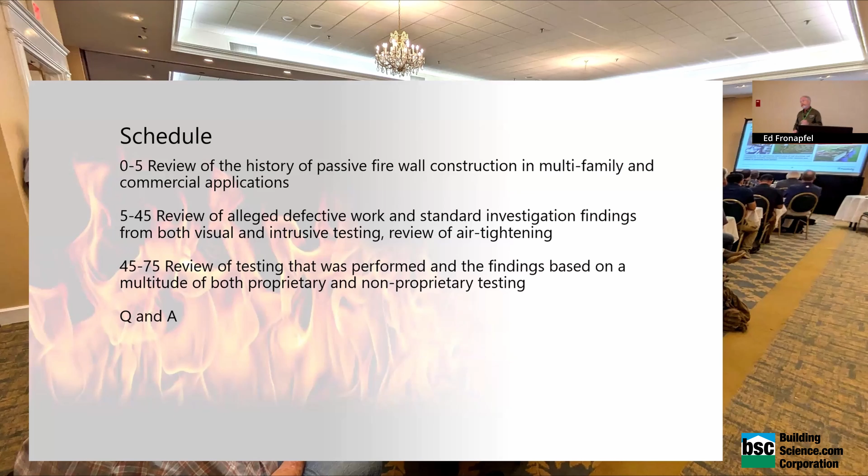So let's get into this. Schedule-wise, I'm going to throw it up. You can ignore it because I only need one slide. I've got 141. So we're going to see how far we get in this, right? But we're going to talk about a couple things. We're going to talk about the history of passive firewall construction, the reasons for it. We're going to talk about the alleged, right? Nothing's proven, the alleged defective work. And then we're going to talk about the testing. In combination with that, we're going to talk about the interdisciplinary needs between all of our professions and how it relates to firewalls, specifically the shaft wall assemblies.

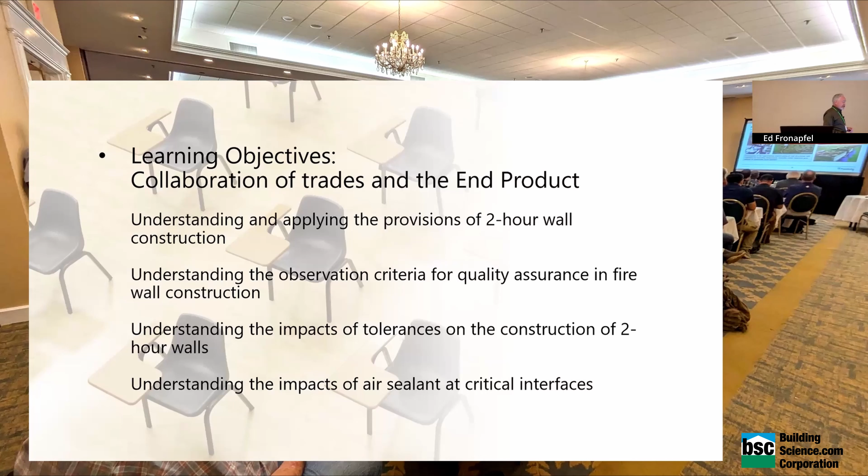So collaboration trades as the end product, applying the provisions of a 2-hour wall, understanding the observation criteria that we, particularly if you're investigating or you are quality assuring. Only the contractors adhere to quality control. The rest of us just assure, right? That's it. We don't look at everything. And then understanding which are the impacts of those critical tolerances. And we'll talk about what we found in the testing.

So the basics of fire, I need 3 things: oxygen, heat, and fuel. So the first thing I could do to avoid a claim is what? I could build in outer space and make sure there are no tenants, right? If I want to build, Joe talked about the perfect wall. As an engineer, I'm going to build a hoop because I like hoop stress. I'm never going to build anything with corners. My windows are going to be round. And I'm not going to put any doors in because then nobody enters it. And I am good to go. Right? No tenant, no lawsuit.

But really what we're after is oxygen and heat and fuel source. And the oxygen in regards to the 2-hour wall and in regards to energy ratings and fire blocking. That's really where we're going to spend a lot of our time today. So we're going to do this as a forensic engineer. And we're going to look at 2 things under NFPA 921.

Now, you'll see a lot of codes come up. You'll see manufacturers come up. Everything on here you can get. It's all public except my testing. And you'll get some of my slides and my testing if you download the presentation. Everything else you should be able to find online, nothing proprietary. So you'll see manufacturers' names, products we tested, anything you can get, right? Except for my testing. You'll have to talk to my clients about that. But I want to show it to you.

So inductive reasoning is based on empirical data the investigators collected through observations, knowledge, training, and experience. So that's where we start this. And deductive reasoning, differently, does not have a valid or reliable conclusion unless the hypothesis can stand the test of careful and serious challenges. Right, so in the courtroom, we can't have ipsy-dipsy. I can't go in there and say, this is my belief, and therefore it's true, unless I'm Joe. Joe can do that. But Joe's is backed up with years and years of testing, right? So we need to be really careful where we go with that. And we want to prevent confirmation bias that's formed solely on the supporting data. So we want to be really careful.

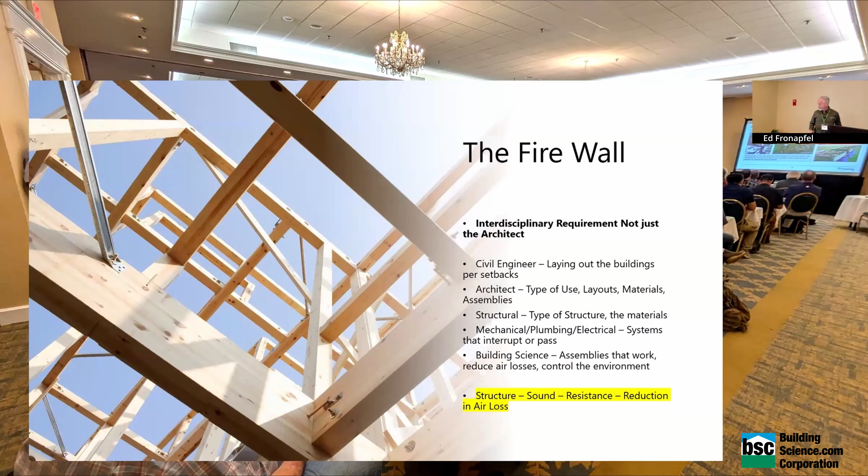So we want to do this under the UL fire rated assemblies. And as I mentioned, if I open up the orange books, and every contractor has the orange book in the trailer on the site, right?

And the architect copies the orange book and puts it on their plans, and there's always a set of plans on the site, right? And every subcontractor has thoroughly reviewed the plans that were on the site and has their own copy of the plans, right? Yeah. I live in a perfect world. It's really nice where I live.

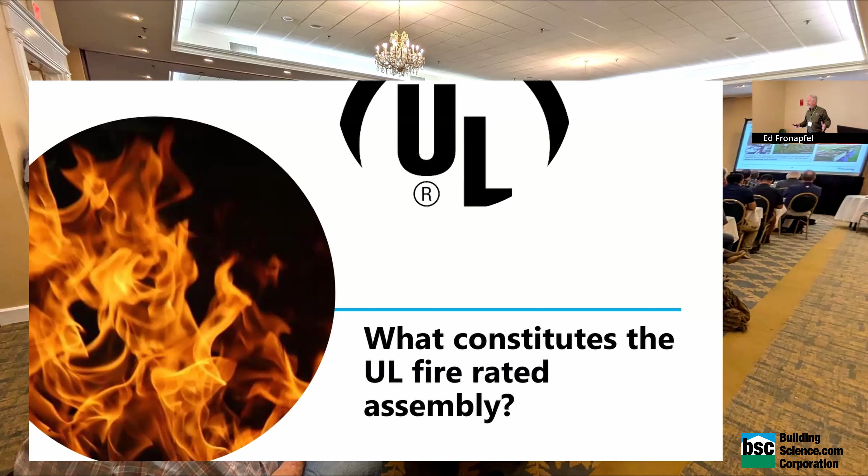Doesn't happen, right? So we're going to look at that combination, and really we fight over, and I'll show where the graphic comes from, that tested fire-rated assembly. And we're also going to look at the building envelope and air tightness across this shaft wall and some of the impacts of that.

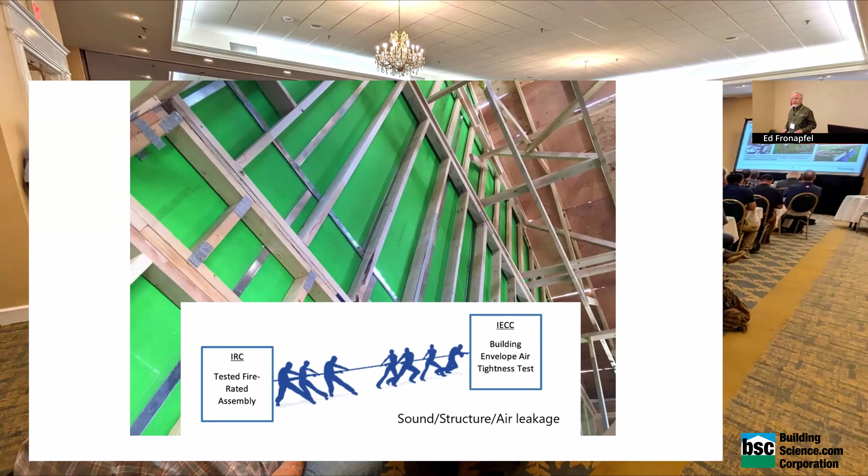Again, I thank Robby, because I learned so much as he went through it about things I was missing as inspector, because I'm there as a structural engineer. I'm not there to look at your energy. Not my job. But it ends up it was my job. I just didn't know it until I was told. So now I know.

And that guidelines there, townhomes, obviously an important part of our housing market, particularly with affordability and making sure everyone under 45 can buy a house just like we did when we were under 45. We'd like those days back someday. Hopefully we get there. And we look under those townhome area separation walls, in this case under construction, how they work, what they do. So I won't get deep into this, but I want to make sure it's clear this is an interdisciplinary topic. Something we should all be concerned about and all pay attention to.

Now, the 2-hour wall assembly was a pretty decent assembly. Make sure I can do this right here. So this assembly, I remember how to get to the laser here. It won't react? Oh. But I can't do that. All right, we'll get there.

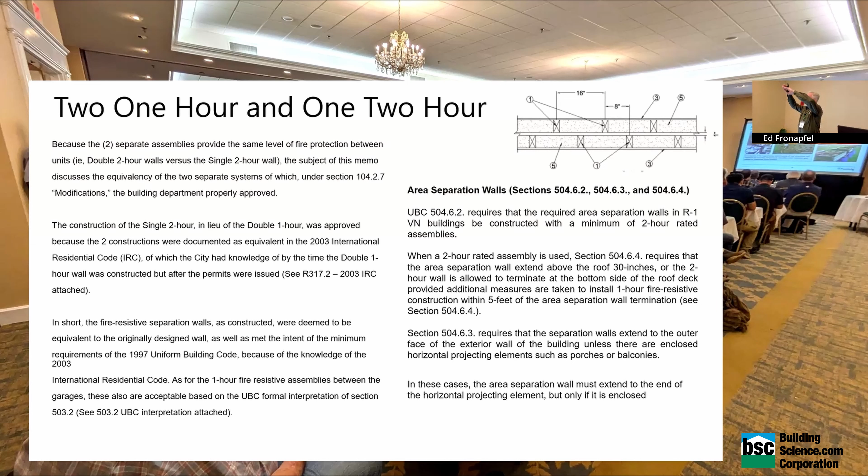Now I mentioned if we step the foundation and the neighbor's unit goes 18 inches higher than mine, do I have to extend the 2-hour wall vertically? Just 1 hour, because now I have property to the side with no building, right? So there's a lot of things we want to think about as we go through this.

Do I have to put drywall in my attic? Okay, a show of hands: who does not believe I need drywall in an attic? Boy, not one hand went up. So how come every time I inspect a property, every time, I have no drywall in the attic? All right, well, I'm glad no one raised their hand. We're going to have a little conversation about this.

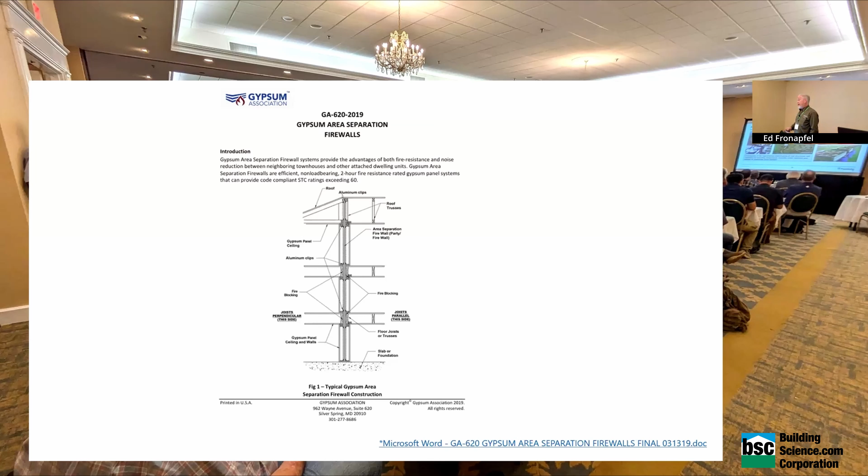Perfect. So we'll talk about that roof truss. We're going to talk about the area fire separation wall. We're going to talk about the fire blocking and floor lines and the foundation. Now, when I look at this GA 620, what am I testing at the lab? So I get a UL designation for a shaft liner. I look at this. What do you think got tested? An assembly got tested. This is not that assembly. All right, we're going to talk about some of those in that regard.

Now, NFPA 221, very important. It really helps in understanding how these firewalls get put in. Good illustrations. It's not just the building code, not just the manufacturer. So if I'm in a forensic setting, why do I care about all of this information? Standard of care versus standard of practice. Standard of practice, the argument is, well, I do it because Lisa does it, that's how Jen does it, so I'm going to do it the way they do it. Standard of care is what you should have done, not what you actually did or what others do. So all these codes matter. We have to have that education as we put these together to make sure we've done it.

A nice way to think about that is if everyone's driving 90 miles an hour and we pass the trooper and I get pulled over, can I say, well, I was just doing what everyone else did? Probably not. I could, but you know, I could definitely try, right?

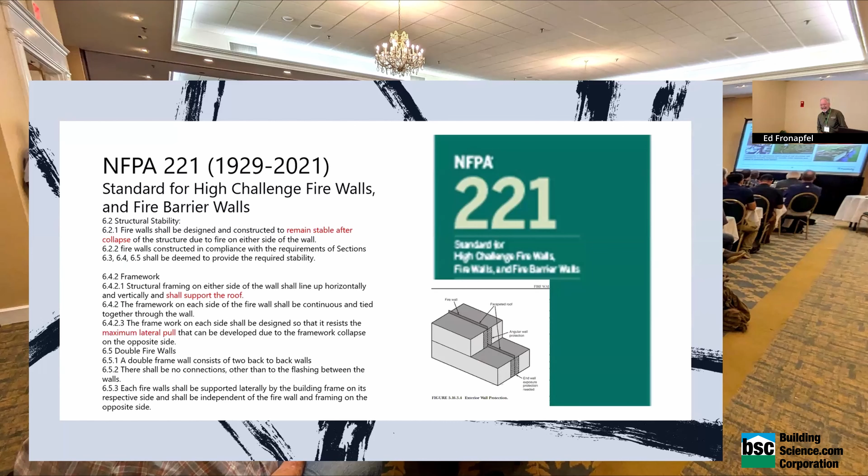So we're going to move to this 2-hour separation wall, and we open up the manuals, and it shows that floor line connection. Again, was that tested? The answer is no, that's not tested, right? Standard construction practice, we have the shaft liner wall, which was tested. We have fire blocking, we have frame, and we have the beauty wall. The beauty wall being, again, where I hang my photos, my term, but that skeleton wall with drywall. And so we look at that.

Now, if I'm building on a foundation in a townhouse, how much movement am I allowed from the structural engineer? Simple answer, by the way. None would be awesome, but that's expensive. Only in nuclear power plants, right? Well, it's enough that it doesn't damage the materials, and it's not perceivable. What's every engineer's favorite answer? It depends, right? It depends on the finish, the client. Can they afford hourly attorneys, or do they need contingency attorneys? If they can afford hourly attorneys, my tolerances go up, right? If they can afford the attorney, they can afford a better house or a better office building.

So what happens with that is we're seeing movement at that step where the slabs flex, and it's opening up the firewall, the airspace. What happens to that fire blocking? It falls to the bottom. So I need to talk to the structural engineer. If I have a 30-foot high townhome and I'm 30 feet from each slab edge and the slab edge drops 2 inches, what happens 30 feet up? 30 feet, 2 inches, 30 feet, 2 inches, right? The whole thing racks. So the fire blocking will drop, guaranteed.

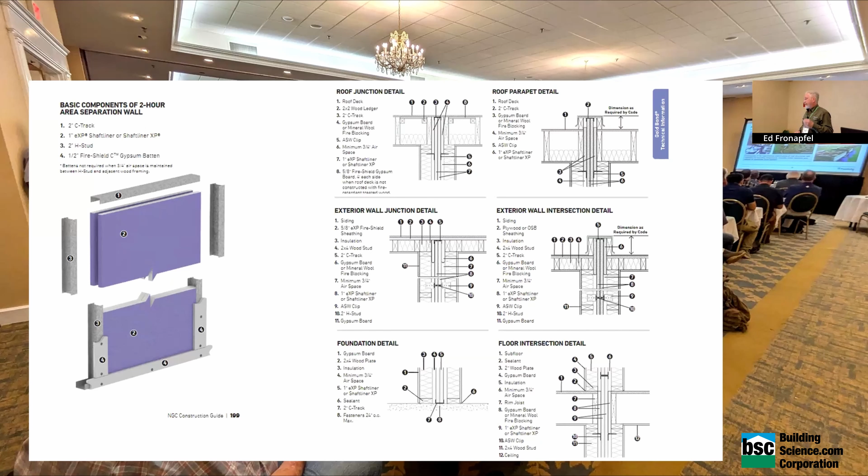Bring all manufacturer installation requirements to the site and follow those. Is the architect still potentially responsible if they're wrong? Probably, but at least the manufacturer might be with us, right? And one thing we found with this, the manufacturers, I'll put them up, we did not find an issue with the product, so I'll start there. These shaft liners in my tests worked. And that's a really good sign for everyone, right? That I can repeat that.

So the Gypsum Association starts off and they tell us, always use back-to-back C runners between courses in gypsum area separation walls. Do not substitute a single H stud for specified back-to-back Cs. So this is in the horizontal, I cap it. I start my next sheet up. Why don't I want to use an H? I'm a structural engineer. What do I like about the H? It's structurally solid. How are the Cs put together? They're screwed back to back. They're not as rigid. Right? So personally, as a structural engineer, I'd say, well, I think an H is better.

But will the H track vertically fit in the H track horizontally? With a little bit of bending. Right? A little bit of bending. So they tell us not to do that. They do tell us to put the code fire blocking on each side. And at the top floor, the firewall may either extend to the top of the parapet or terminate under the roof deck. And then if it terminates at the roof deck, we do the 4 feet horizontal. Right? So some things to think about.

Sound, I've got my 2-hour rating, great sound STC, 65 to 69, which means in the field I'm allowed what? Quiz from yesterday. Not by code. Code allows a 5-point reduction. Construction tolerance for sound. Right? So the code does tell me for sound what I can achieve. So I can lose 5 points in the field test and I still pass. Now on the 2-hour rating, I noticed the sound test is 35 to 39. That's the tested assembly. Right?

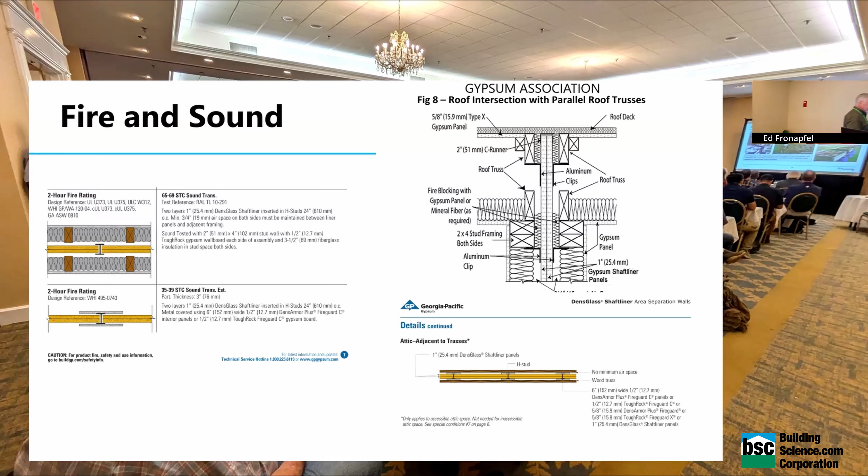I've done this a long time. I've seen it done in repairs when we don't have clearance. We're going to talk about the clearance. There's also an exception to that that says accessible attic. So we're going to talk about some of the accessibility needs. So we're going to go back to the energy code and we're looking at the compartmentalization on this. And we'll talk about the guarded and unguarded. And I do this because, again, I'm trying to tie the energy people into the structural, civil, architects, everyone else, right? We have to be working together.

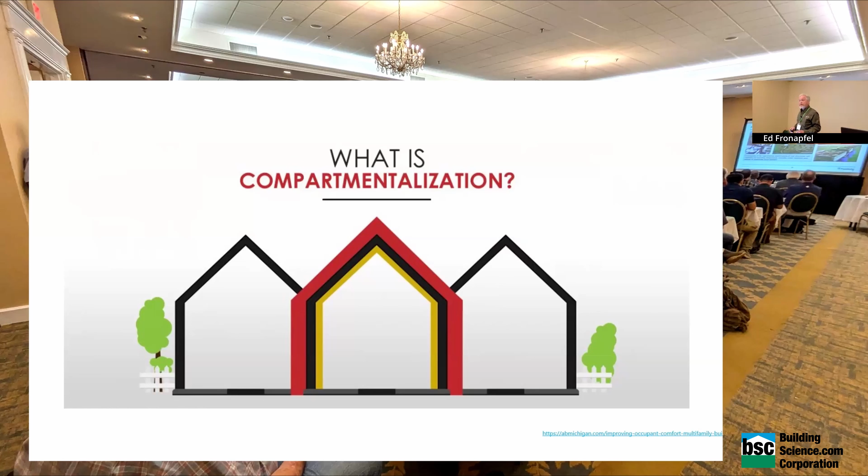So we want to look at this, and you've heard over and over about the CFMs per square feet, all the testing that's done. Same as the condominiums, right? The condominiums, the difference by compartmentalization is the airspace, and the HOA owns everything else. So if I'm hired to fix one of these or look at it, I probably should know, is this condo, townhome, or party wall? Because if it's party wall, I'm going to have the agreement between all the neighbors, no HOA. If it's condo, I only have one client.

If it's townhome, I might have three. Property owner A, HOA, and property B, right? The condo, I'm just dealing with the HOA. I don't care about the owners because you only own your airspace. Right, we already said we were taking all the windows out, so there is no air, so I don't have to worry about those people. They're done.

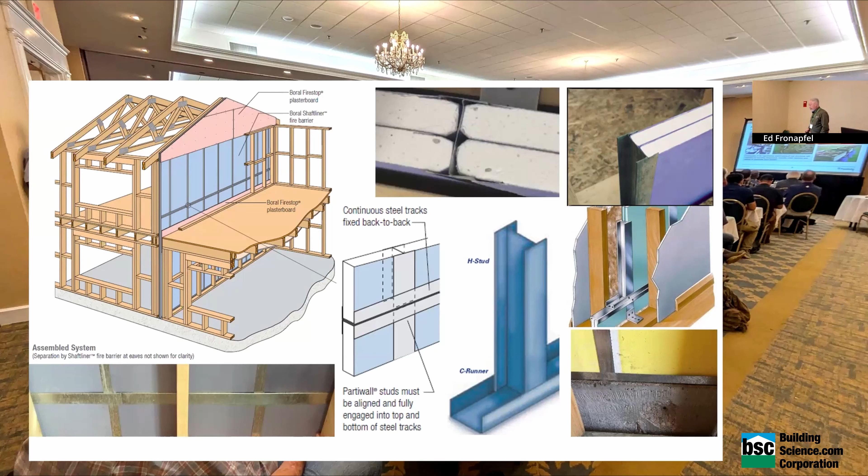So we look at that, and we start looking at each of those assemblies and the location, so we can see on the middle, we can see the vertical H running up. We can see the C runner at the base of the foundation. We can see the back-to-back Cs at the horizontal joints, and then the clips at the structure. And what we're after is that complete assembled system, free of holes and breaches, right? So just so everyone kind of knows the pieces we're looking at.

We get in the attic, and now Gold Bond does these great installation videos. So I put them here. If you just want to watch it ground up, actually most of the manufacturers have these now. If you're speccing these, watch their videos. The manufacturers have done a fabulous job of how to do this right.

They really have, right? I go to court and they'll bring in this animator and they do an animation of how to build a wall. And my comment is, well, I can just click play on the YouTube. You paid $45,000 for an animation? I can just bring the YouTube and click play for the jury. Pretty simple. But the animators make good money. So if you're an animator, keep doing it, right? Keep doing it.

And then we look at that. We don't see in that detail any gypsum in the space up above, and that's normally what we see. We also see that gable end truss. Structural engineers, what's important about the gable end truss if the townhome units are required by code to be structurally independent? Where's the diaphragm? That's the roof sheathing. So if it's structurally independent, each side of my townhome, and I have lateral load, how's it get to the foundation? Through the gable end truss.

So that truss has to be designed to take the full unit's lateral load, transfer it to the top plate, transfer it to the rim joist, transfer it to the bearing wall, one more floor down, all the way to the foundation, and then the soils get it. Right? So if I walk in an attic and I don't see diagonal members, should I have some concern? Yeah, right? Who can design a frame wall with no sheathing and let the wind blow on it? Maybe so, right? So we should be looking at that. What is the structural independence at that gable end wall?

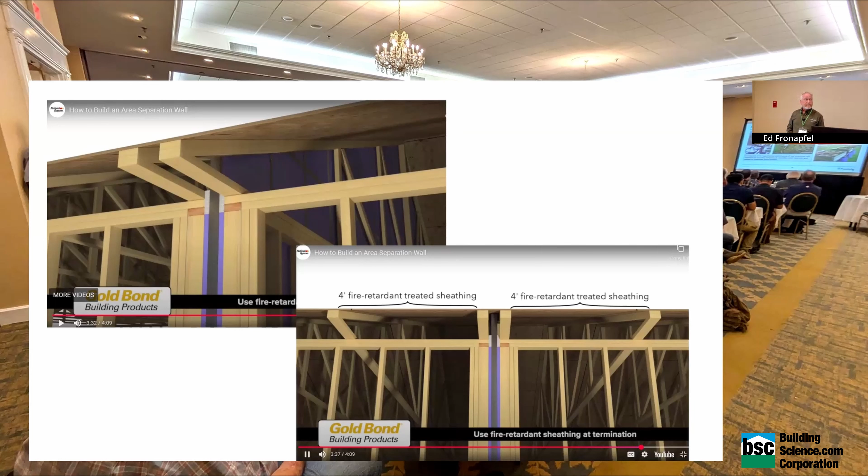What if I'm a design build firm? What if I'm a design build firm? The code has an exception that I, as contractor, can be my own designer in responsible charge. So that is allowed. So some things to think about.

So everything's next to each other. We're looking at horizontal separations, verticals, mechanicals, sprinklers. Why not just put sprinklers in? What's the advantage of the sprinkler versus a 2-hour wall? 2012 code, 2015 code. What changed?

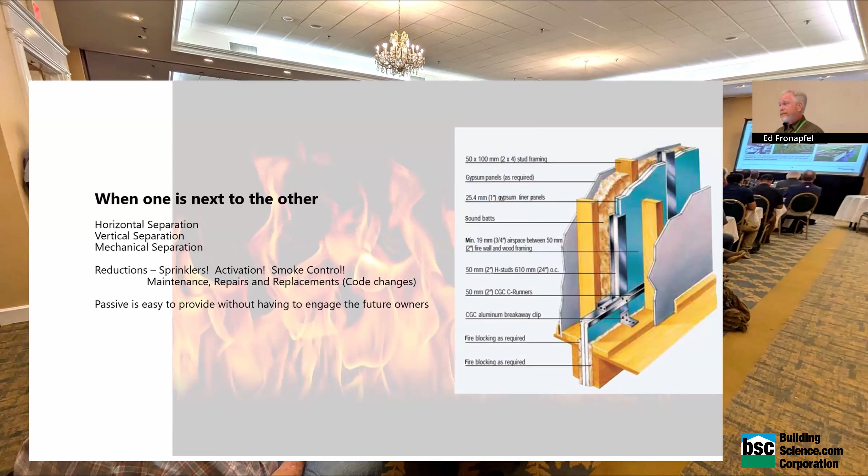We got rid of the need for two 1-hour walls or a single 2-hour wall and said we only need a 1-hour wall if you have sprinklers. So my entire topic, if you have sprinklers, you can go get coffee. We're done here. So we want to think about now the guarded testing.

If I'm looking at the condo side, I'm looking at firewalls, right? This is the difficulty of how to do this. We see this quite a bit on assisted living, independent living, where do we do our test, right? So where do I get this information? I open the code up. Do I find guarded or unguarded testing in the building code? Anyone? I mean, this room's full of experts. Do I find a description of guarded testing and unguarded testing in the rules in the building code?

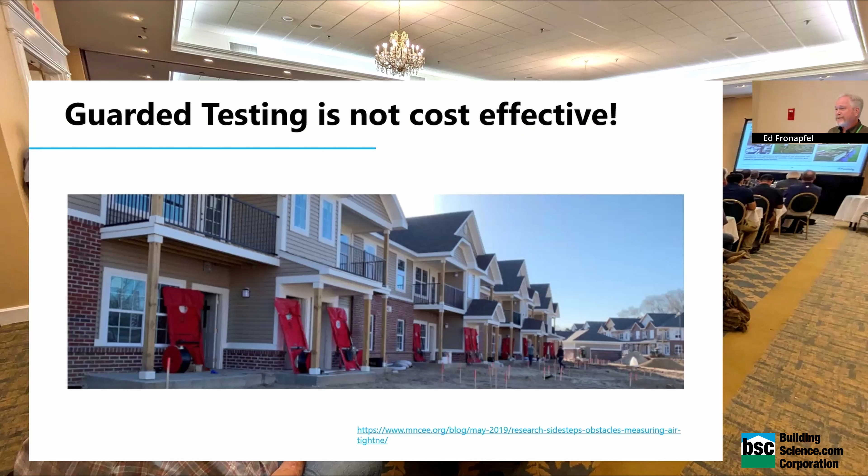Yeah, not in the code unless it's adopted specifically by the code. So we want to know where those are. So guarded testing, if I sell the product, I love it, right? Lots of doors, lots of controls. I was talking to one of the mechanical, electrical guys about designing this and putting all the equipment in so everything runs perfectly, all of them at the same time. I don't remember who that was, but, right? Otherwise, I just go turn each of these on, or I have one of my employees in each house with the Motorola radio, just like 1995, right? We'll figure it out.

So I go back and I start looking. There's this guy, Joe. He's done a lot of work. And oddly enough, the Gypsum Association recognized that. And they said, refer to field testing of compartmentalization methods for multifamily construction authored by Kohta and Joe, March of '15, right? So now I step out of that and I just Google it because it'll come up. And magically they talk about the fire-rated assemblies and air leakage, the Holton and Prahl study, and the air leakage of fire-rated side-by-side area separation walls, multifamilies, the negative results for energy efficiency and comfort, and air leakage from one party wall to another party wall.

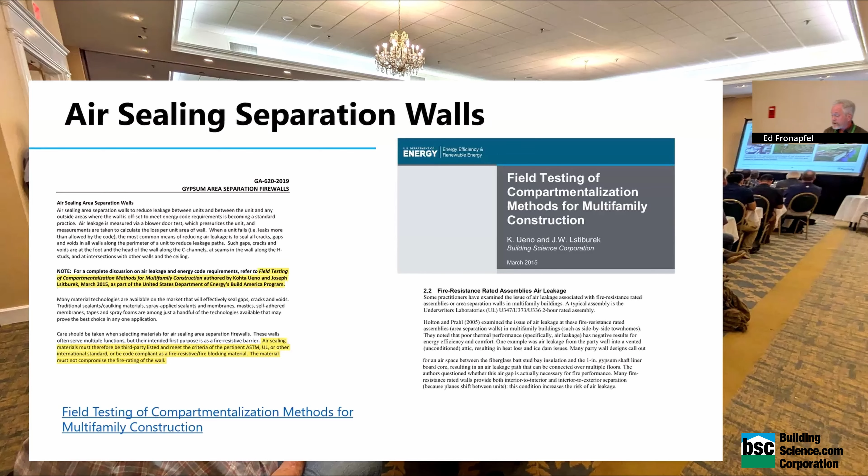Now, do I care about that as far as energy? Linda's got hers at 72, John's got his at 69. Do I really have much delta T? Odors and sound, right? So we get back to this interdisciplinary thing, odors and sounds, and smoke, potentially. Particularly from the interview yesterday about who doesn't like the smell of cigarettes and who does. So if you live next to the smoker, you're going to care much more than if you don't. So we do want to be concerned with that. We looked at that and the studies in these spaces in the shaft wall.

Now, in the study, from the firewall at the attic, what's missing? That gypsum, right? If I have to put it there, it's not there. Do I need it? We'll talk a little more about that. But you know, I opened the study up and I said, well, they don't have it, then I don't need it. I did what they did. Right? So I will look at that interstitial space at the floor line and see the foam. I'll look at those areas of air leakage. I'm going to work on my details.

Now, these condos are staggered horizontally. Will that create more issues? Yeah, I start separating the wall. Now, we talked about the vertical wall. What about the horizontal wall? Does that have to be 2-hour rated as it extends past? Yeah, the room is quiet. Some people say yeah, some people say I don't know. Really, a 1 hour by code, I could decipher that as a single 1-hour wall once I pass the other unit. Some municipalities will say, no, Ed, if it's under 4 feet, I want 2 hours. But something I should address with the architect.

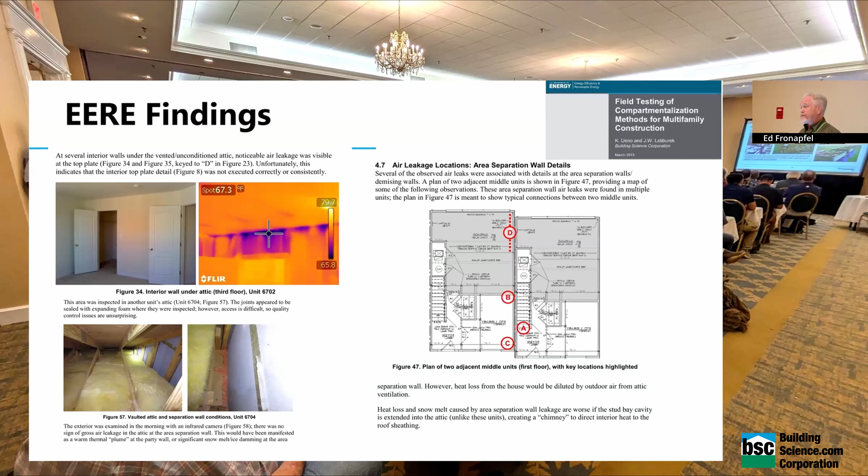And what about the civil engineer? Yeah, probably so, right? We're staggering the units. So again, that dang civil engineer, we just thought we got rid of them once the grading and drainage was done. Now I got to keep bringing them back about my property lines. And now AeroBarrier presented, and I appreciate this, and this is where Robbie and I started talking about the Thrive study and the rule: if I have to pick that pen up, I got a problem. So let's design and build so we don't have to do that, build that compartment. And we did look at this. Now, will the AeroBarrier system reduce the propensity for fire movement?

It will, by the way, if I can seal those holes. It's not going to hurt it. Is it tested? Can I count on it? Right, so I'm going to have to do another round of tests, and maybe they can make this, you know, so it'll expand during the fire. Just some thoughts for somebody who wants to patent the product. If I could convert this into helping my fire assemblies, it'd be great.

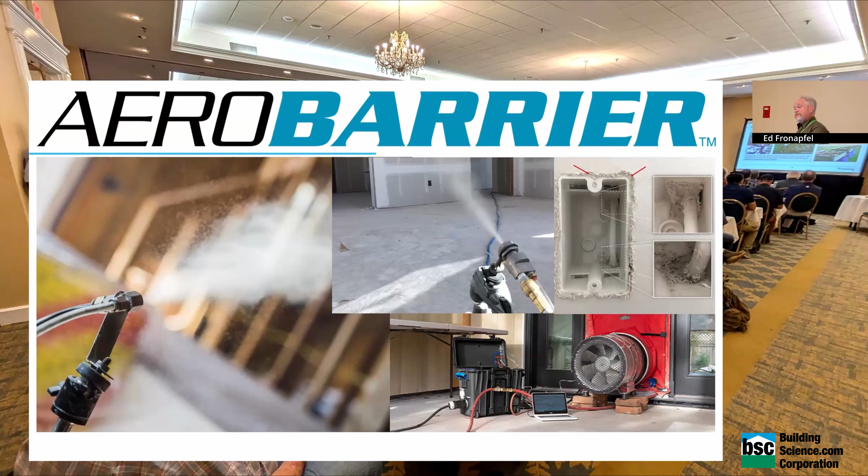But nice deal. Air changes, definitely. This is out of the Thrive study. Again, online, you can pull it. But some big changes through those sill plates. Lots of leakage in standard multifamily. So we talked about the structural engineer. What's the tolerance on the sill plate for the concrete under the sill plate for undulations?

ACI 117. What am I allowed? Plus minus 3/4 of an inch. Yeah, that's a lot. But we have sill seal, so we're good. How many layers? For my clients, yeah, they forget it anyway.

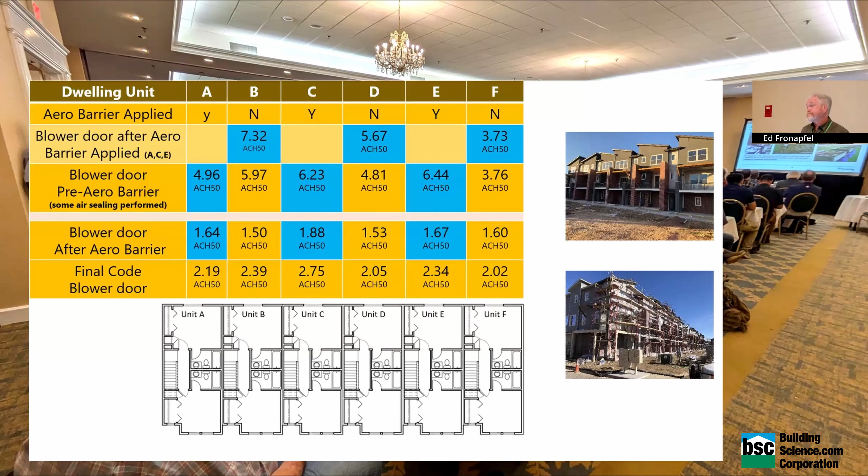So, and then the C channel at the base, it needs to be sealed as well. So we have a number of things that help with sound as well. And I won't jump through all these, just so you know they're there. And we jump back into the other study. We look at the analysis and recommendations prior to that study. And it's pretty similar findings in regards to what we can do to minimize air leakage.

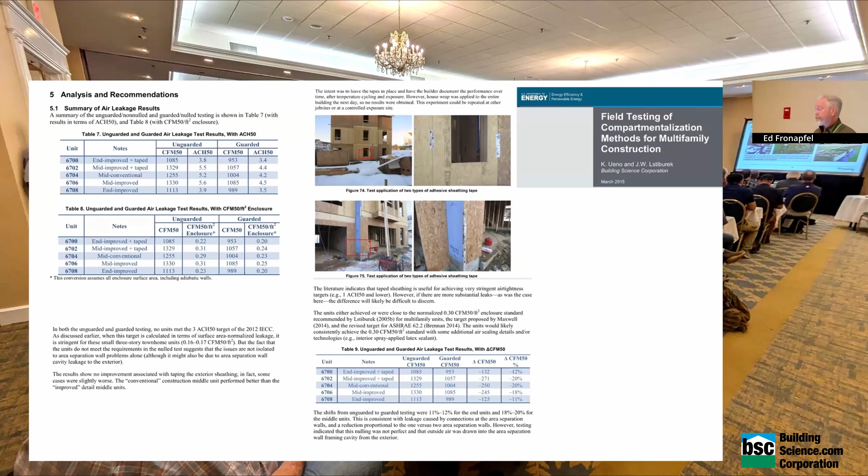And again, I do this because we're dealing with the same wall. So I want everyone thinking both ways. And that does show a great thing with the jogs and the attempts they did trying to airtight the jogs. So thank you, Joe and crew. It's all out there, right? We need to pay attention to what's already been done and try not to repeat the mistakes of the past with that. Yeah.

The air wasn't going from unit to unit. The air leakage from outside is traveling through the shaft liner wall assembly, through that wall next to the... Yes, remember you have that 1-inch space, you have your shaft liner, airspace, beauty wall. So this is in between, on the unit side, in between, and up to the attic, right? But my point being that the AeroSil products that we can see here, they are filling those gaps. So if I can get those gaps to fill, that's a good thing.

Eyeball, not your gap between the framing and the shaft liner. Correct. Yep. So we can see the impact of that, and we just get to what Robbie's talking about, is where is our airflow, where's it coming from, that interstitial space. So if I can close some of those up at the drywall layer, the membrane, I'm going to reduce it from coming outside, also through the fire blocking joints themselves, if I can get there. And we look at the one on the right. Can I get my fire blocking in there?

What can I do? So first off, we'll start with what's the minimum airspace between the wood and the shaft wall? 3/4 of an inch minimum. That's the technical requirement. So would this pass? Probably not 3/4. If I look at the clip with the vertical H channel, how tight is the clip between the framing and the DensGlass? Pretty tight, right? So this would be a failed assembly.

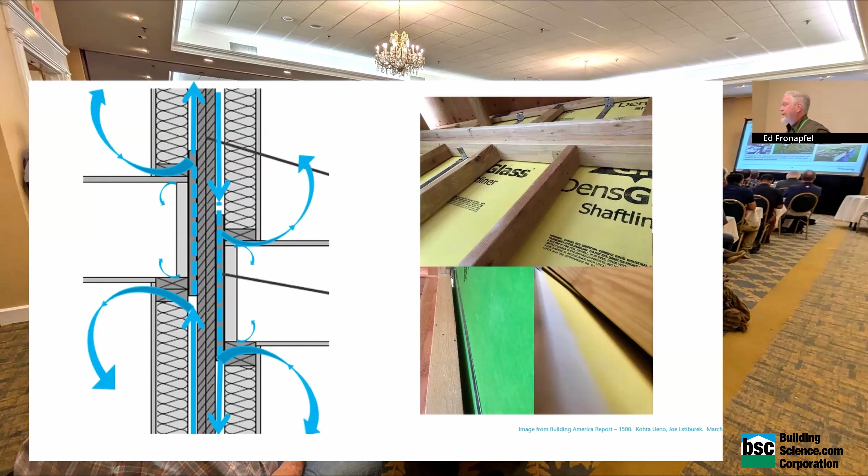So on the bottom, that's a nice 3/4 inch space. Nice straight stud. Who's gone to Home Depot or Lowe's lately? Can I get a straight stud? Short of the structural engineer. That's a joke, right? Pretty tough to find.

So we look at this and we start looking at fire blocks, say, what can we do? So I put in that 3/4, I've got a nice space, I slip that in on the liner, I put the clip in. Now I see on that clip, I've got 2 screws in the wood and 2 screws in the H channel. What do you think? What's the manufacturer say? All right, we're going to talk about that. So as a structural engineer, I like more is better, redundancy. Right? I wear a belt and suspenders. That way, if one fails, I'm still set.

I don't have my suspenders. I'm taking a risk today that my belt won't break. I've taken a risk, right?

So I look at that, and I look at the screw patterns. I look at the fire stopping. Now, what about the foam fire stop? Why is it not acceptable? Okay, hang on to that thought. We'll get to you, Robbie. We'll get to you. All right, we're going to look at that.

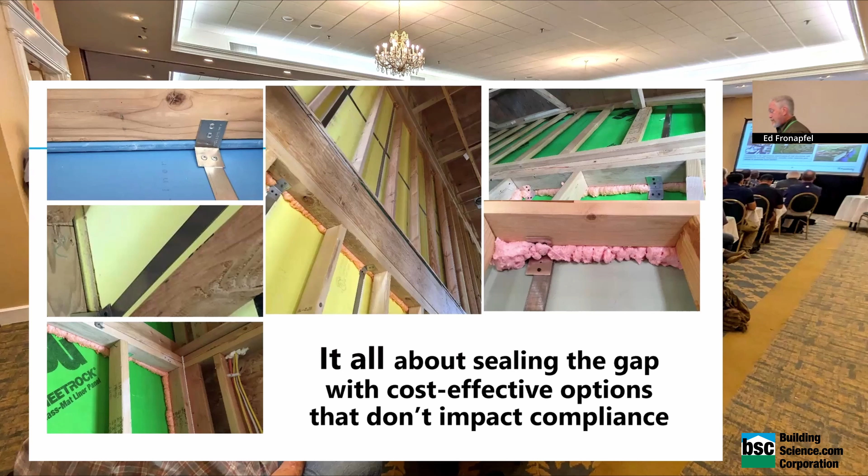What about the fire sealant at the clip? What do you think about that? Equivalent to a fire stop? We'll say that the sealant's fire stopping material. Let's just do that hypothesis. What about at the clip? Who likes that? Not a great application. How about if I have this from the top side down? Probably better, right? If I'm into the space over the clip versus trying to bypass the clips.

So what we're after is to try to get this all to fall down on one side perfectly, right? I want this complete 2-hour shaft wall to allow for one townhome to fall in. Now, I have a question for you. If this works perfectly, as it appears to here, almost, will there be any damage to the neighboring unit? Water damage, smoke damage. Maybe the fire got up under the porch lid.

Want to talk about a vulnerability of offset townhomes with porches? The fire can get up under that porch. So let's vent the roof and let that fire out. Just a thought. So that's what we're after, is to try to minimize. And notice I don't use the word prevent, and you guys can all lose the word prevent from your vernacular for the rest of your lives. We don't prevent anything. We minimize the potential to an acceptable risk within our industry.

When I'm a civil engineer, I design retention ponds. I designed for a 100-year storm. Potentially, it comes with a 1% chance every year, right? Over the basis of a year. I don't prevent a bigger storm. I'm just designing for an accepted criteria.

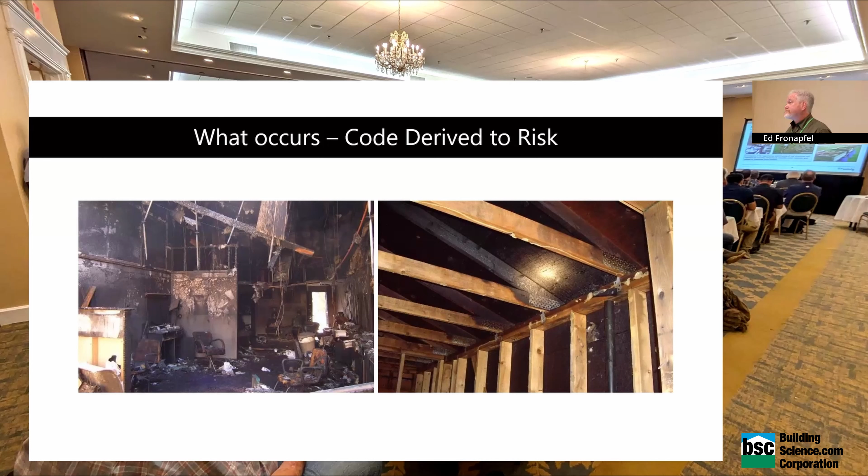All right, so just put that in the back of your head. I'm not going to talk about that anymore, but next time you're in an attic, start thinking fire. Start thinking through those pieces. By the way, what happened to the wood frame truss plates in this fire? Nothing. So some things to think about.

So now we get to burn stuff, right? We're going to start testing it. Look at those assemblies. We're going to look at 5 shaft liners. Again, for everyone's sake, every one of my tests has worked unloaded. So that's a good sign of industry across the board. Why would I want to test all 5? Or equal. So can I substitute one manufacturer for another?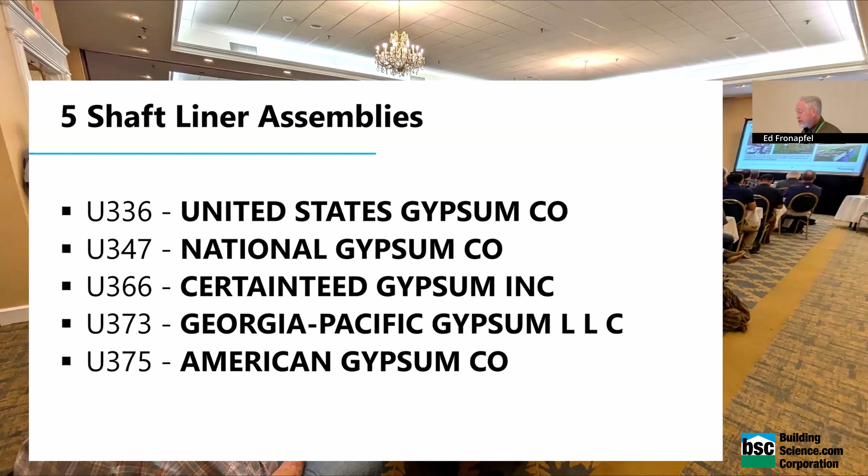The architect called out for U347. Can I substitute a U373? How do I do it? RFI, right? I send a request for information, and I see if I can change it. Now, why would the architect be hesitant to change it? Extra work. Are they going to get paid for it? It was easy to write by others, deferred submittal. You tell us what you want to use. But if I use the manufacturer's details, I now have to go back and review the new manufacturer, and I have to do the same diligence under responsible charge to make that happen. All right. So we're going to look at those. We're going to look at the ASTM E119.

We're going to look at the response of materials and assemblies to heat and flame under controlled conditions.

By the way, I can speak at 285 words a minute if you need me to speak that fast, so I can speed up and get everything done. So if you're in a deposition, this is a really good way to do it, right? So you just speak really fast. Everything's audible. They're taking notes. And then the court reporter kicks you. They don't like it, but we can push through. So if I go fast when I read, I apologize.

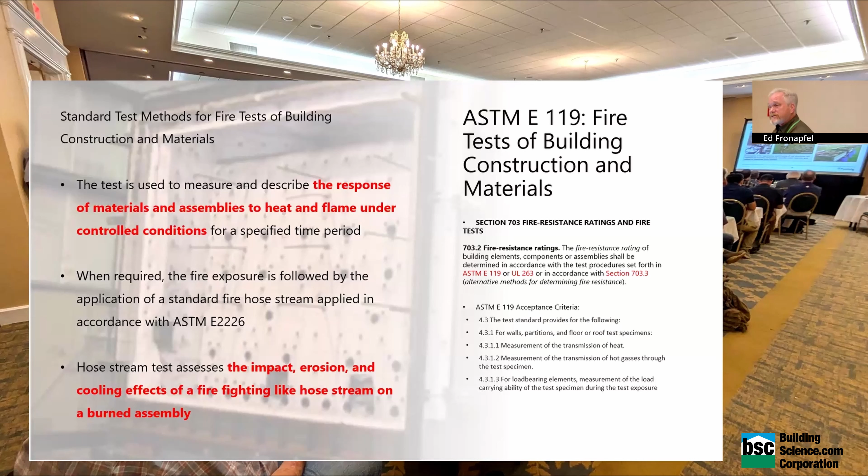It's a bad habit. So we're going to look at the response of materials and assemblies to the heat and the flame under control for a specified time. And then we're going to do a hose stream test. And the hose stream test is to assess the impact, the erosion, and the cooling effects. It is not to represent the firefighter standing in John's attic spraying Linda's wall with the hose. That is not the test. Right? So if somebody tells you, well, that's when the firefighters show up, they want to make sure it's intact for the hose stream, that's not what this test is about. And we do get that argument.

So we're going to look back at these walls, and we have to decide what it is we're going to test. So what was tested was the bottom right. Everything else is untested. Right? It's just what we do. It's what everyone else does. But they are still untested pieces in this wall to consider. So we'll look at the significance and use. We want to look at the relative measure of the fire test response of comparable building elements under the fire exposures, not representative of all fire conditions because conditions vary with changes in the amount, nature, distribution of fire loading, ventilation, compartment size configuration, and heat sink characteristics. All fires are not the same.

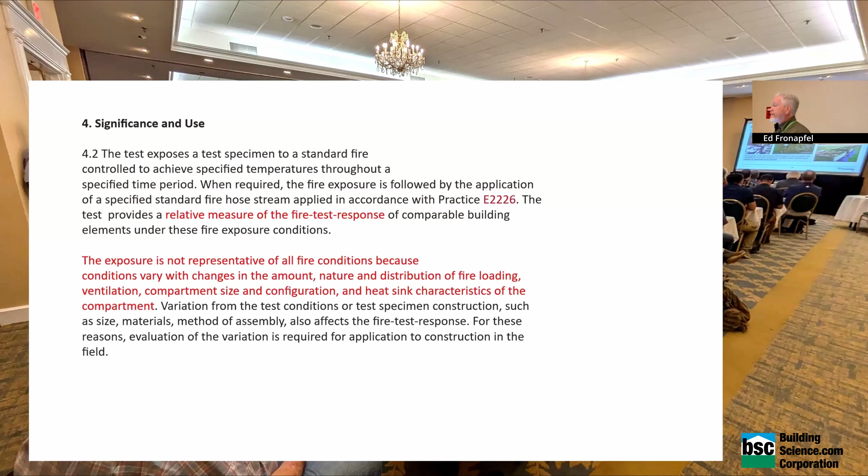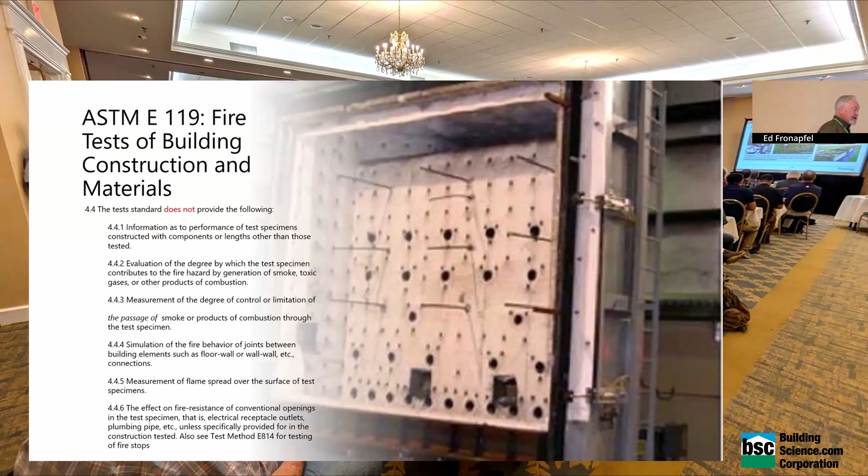Right? So if I go to a site and I say I have a 2-hour wall, will it perform in 2 different fires identically? And the answer is no. It will not, right? This is a laboratory test. And we're using the UL rating as a laboratory test on a constructed assembly. So know the limitations of it and what we're doing with it. So we're going to build this, we're going to look at the degree of control, the passage of smoke and flame, the fire behavior, the temperature, the effects on all these pieces, right? That's what we're after. So we're going to build a test specimen.

Our physical property, we're going to look at the ingredients. So section 5.1, the ingredients. And I have to write down my recipe. I have to write every part down. So you'll hear some experts say, well, the building code, particularly IRC, references a cookie recipe. And if you violate the code, a little extra sugar, not enough flour, I use baking powder instead of baking soda, will it still taste like a cookie? It might, right? It's untested, we don't know. So if you want to count up the deviations and then pass them because it feels good, the real question is, are we still complying with the alternative section of the building code,

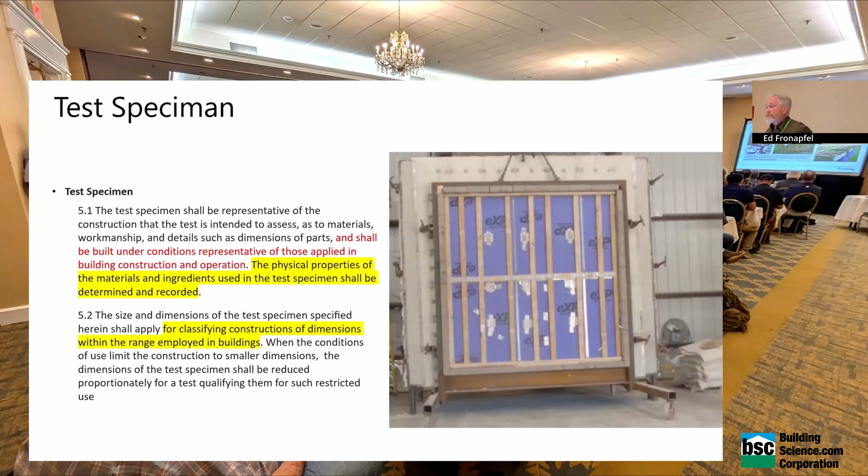104, is that 104.8? I should have everything memorized, right? Unfortunately, kind of the way my brain works. But we're allowed alternatives to the code if they are tested and approved by who? The building official, right? The AHJ. So if I'm going to substitute those construction tolerances in, I have to get approval for it. Okay?

Again, structural engineer jokes. That's all I got.

So we'll look at that. So one of the questions that comes up, remember in the attic, do I need drywall or not? Yes and no. If it's accessible, I need drywall. If I put my HVAC system in the attic, is it accessible? It better be, right? So if I change that condition, then I may need to cover those. If I don't, my opinion is I don't need the drywall. But what's the temperature? So I decided to put my Christmas tree in the attic.

The real Christmas tree, because I'd like to reuse it. I just spray paint it green every year. You know what that's called? That's being green. All right. So I'm trying, Joe. I'm trying.

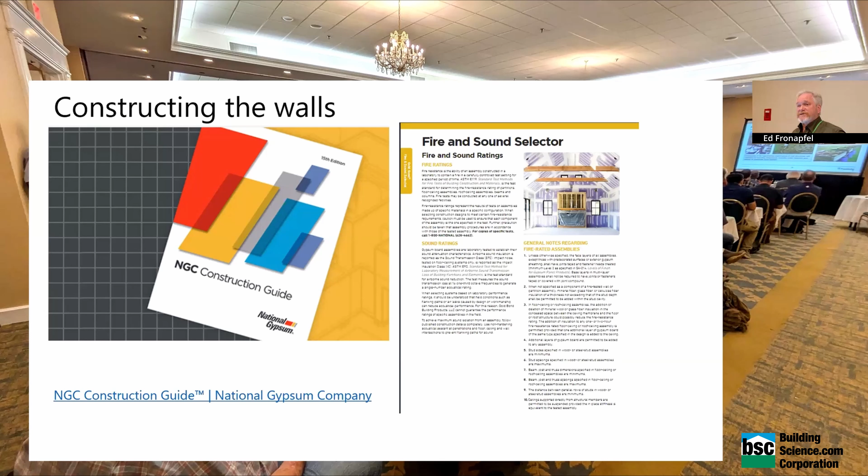It should be good. So we want to look at those sensors. We want to make sure we construct the walls. Now, I can follow the recipe given to me by the manufacturer. My study is about what? About what to do when it's not done right. What is the construction tolerance? So I'm going to look at common deviations from this. I want to make sure I categorize and document the construction, my recipe, and then I look at the problem areas. So we have the clearance to wood. We have the fire blocking, which we'll talk about, the foam. We have the stagger, which I can't test, but we do have that question.

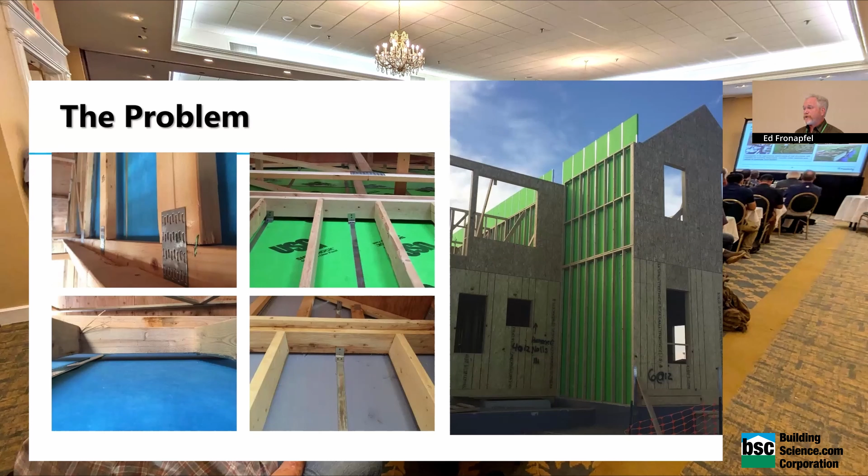Is it as easy to extend the 2-hour wall past my jog? I tell my builders, why not just extend the wall? It's so much easier than trying to build a 1-hour wall past the 2-hour wall. Just make life easy on me if they can. What about at the attic space? So I'm going to bring the trusses in on top of this. So I ran that shaft wall up there. What do I have to do to the top of the shaft wall? I got to make it match the bottom of the roof sheathing. So a little coordination again, that dang architect and structural engineer, just build me a perfect box. I'm good to go. We'll have to work at it.

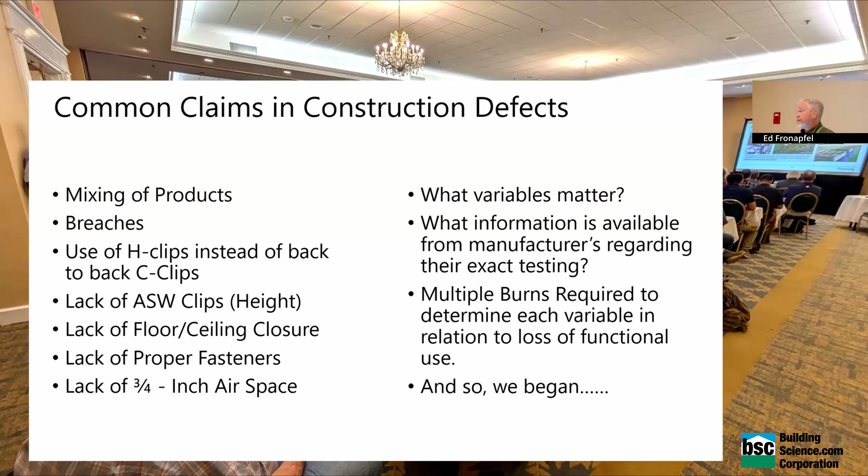So we have mixing of products, breaches, use of H clips instead of back-to-back Cs. Lack of clips, lack of floor ceiling closure, lack of proper fasteners or too many, and then the lack of the airspace. We're going to look at what variables matter, what information is available from the manufacturers, and I note regarding their exact testing. So what's the chance my 5 manufacturers are going to give me their actual test? If I have a good lawyer, they send a subpoena, and we get it under confidentiality. And then we have so many days to destroy it once the case settles. Never be seen again. It's not publicly available. So when you get into these tolerances, and I want to know what happened during the burn, that's where this became very difficult, and why we started burning the walls. We just couldn't get theirs.

So mixing of products, what do you guys think? How about that thermoply? Where's that one located? That's the 4-foot jog out at the front porch. So is it okay to switch National Gypsum and Densglass? Don't know. Not been tested. I don't know. What about the breach in the back-to-back Cs between the product? Not allowed. How about that I can push the edge of this product and walk in the neighbor's unit? Probably not great. Do you see any clips? But the code official approved it, so it must be okay. What? Wrong? Well, that's my first line of defense.

Right? Same question I get every time. But where's the code official? They approved it. They saw everything. How about third-party inspectors, QA? If they saw this one, how do I know which ones they saw? Subpoenas, lawsuits. Nobody wants to just give me their file. Right? I don't know why. Just fess it up. If you did your job, do you care? Right? Makes everyone a little nervous, right? On that. So what about the floor truss, or I should say in this case, the ceiling joist coming to the wall? What's missing? So I went up for the firewall. Who feels good about a 2x12 with no blocking?

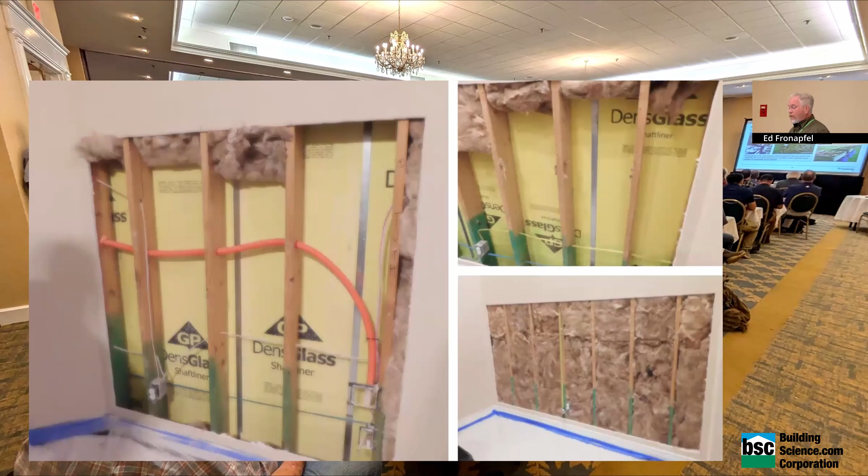How about at the top at the ridge board? That doesn't look like it quite makes it, does it? It's a good thing fire stops at 30 feet. I think I read that in a book somewhere, right? Size of the test chamber. So what about behind the beauty walls? What am I missing? Maybe.

Airspace and clips. Now, some manufacturers' diagrams are 10 feet, some are 5 feet, some are 39 inches. Why 39? Tests were done at 40 inches because 40 didn't work. So they retested the wall, moving the clip 1 inch, and it worked. They missed the first test by 2 minutes. They made it to 1 hour 58, not 2 hours. So they reburned the wall, moved the clips 1 inch closer, and it passed. I'm sure it was the clip.

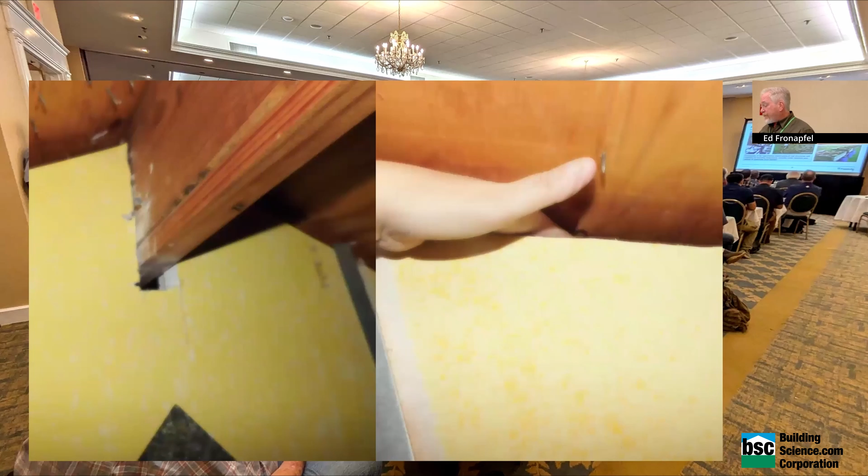I'm sure of it. So as I mentioned, the beauty wall does give us some protection. It should not be discounted, but the beauty wall's not been tested in this condition. So we get up and we start doing our inspections. We start looking for those voids, those breaches. Now, am I going to test this in a fire assembly? Am I going to burn this wall? Not this actual wall. I'd build it in the lab and burn the one in the lab, because if I burn this one, the owners get mad.

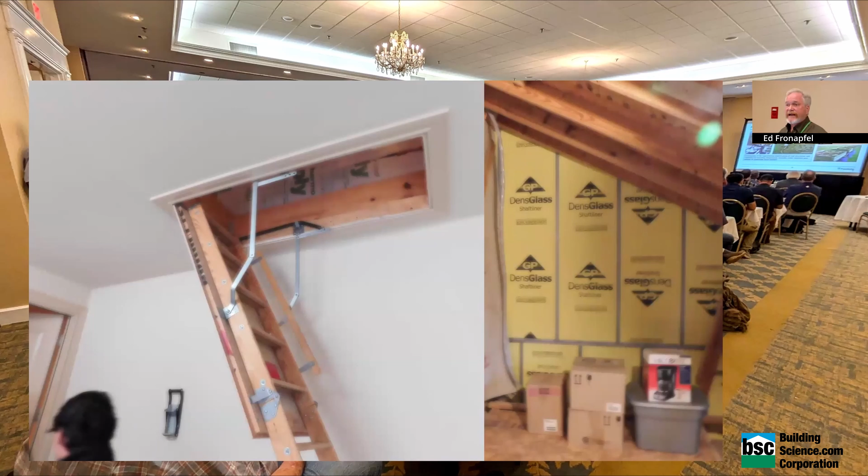I'm not going to build a wall with breaches. Breaches are not allowed, right? Not something in a tolerance. Breaches are 0 for my tolerance. Fire will pass through. Accessibility. Is that attic accessible? Yeah, that's pretty accessible. Are people going to use it for storage? Yeah, they bring their OSB up through the big hole, make the hole small, they can't get up there, right? But once that's made, they can get in.

So I have no gable end truss, I've got no drywall on there, no clipping, all sorts of problems on this. Now I look at those fasteners, I'm going to pull those fasteners out, I'm going to verify the size of those fasteners, wood screws into the wood frame, pan screws into the channels. And this is not me doing the test, this is one of my competitors who then is cutting the shaft liner to validate that 1-inch shaft liner exists.

One forensic test I wouldn't probably do personally, right? It's a 2-inch wall, 2 1-inch liners. It fits in the channels. I can get in both attics. I don't have to cut the wall open to do it. But they did, and then measuring the airspace. What about the horizontal clip? Is that okay? We'll talk about those clips as well. Horizontal, vertical, all sorts. We'll look at the breaches.

Now, the manufacturers and Gypsum Association provide me instructions how to deal with those short channels and the breaches. So you're in deposition, and you say, I'm only going to allow what's been tested. Has this been tested?

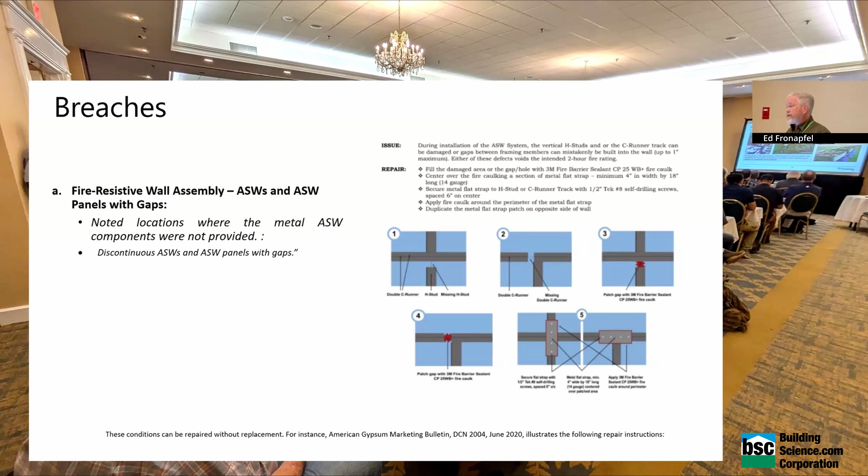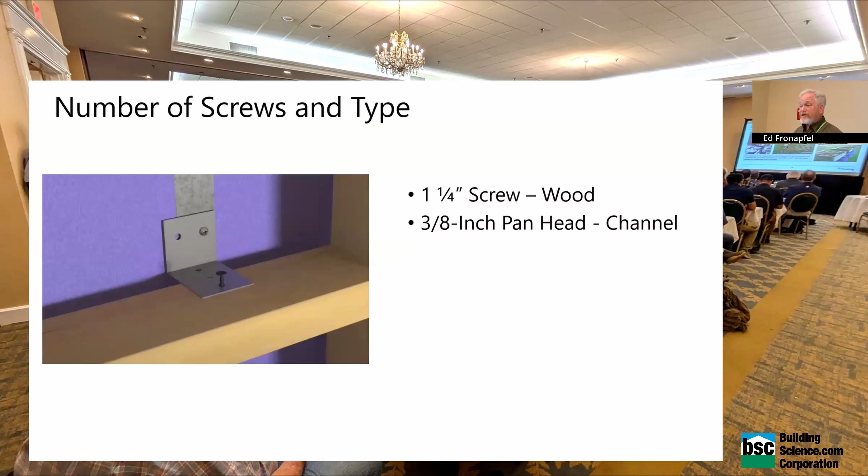Right, so we already have some tolerance allowed. Fairly enough, we know we're not perfect. Right, so we want to look at that. We want 1 1/4-inch wood screws. We want a 3/8-inch pan. And by the way, we only want 1 of each. You only need 1 of each. That's it, right? We look at the spacing.

We have 10-foot clips under 23 feet. If we're greater than 54, we go to a 5-foot spacing to lower floors and 10 foot in the attic. If we go to 66 feet loaded wall, we move down to 39, right? So more clips. Why do I want more clips as I load the wall? What happens when I stand on that 2x12 in the attic? What's it want to do?

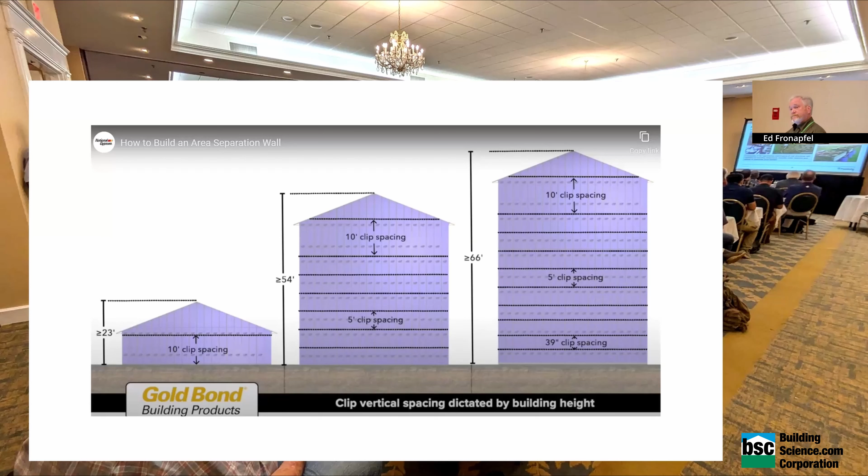Right? In a fire, what's going to happen with one side of this wall? We have 1,800 degrees on one side at one point, and we have not that heat on the other side. We have ambient. Yeah, it's going to expand, and the wall is going to suck in. Right, so this is a structural issue. So we're going to go back to the expert testimony.

And note they always start, we've already gone over this because the lawyers like to ask questions over and over. And there are very consistent certain aspects. Those aspects are consistent with the design that we understand was constructed. So I think it's very likely the balance of the units are constructed in a similar fashion. What's that referred to as? It is speculation, it's extrapolation. I've extrapolated my findings to unknown.

So I've got 2 known points, and I draw a line, and I want to answer a question about what's in between those points. What's that called? Interpolation. Extrapolation, extending the findings outside that, I don't know. Not allowed, right? So we'll start there. Okay, you're not sure how long it will last. I'm talking about fire duration. It does not matter as long as it's less than 2 hours is the minimum code requirement.

If it's less than 2 hours, it's a failure, is what he's saying. What if it's 1 hour, 59 minutes? It's less than 2 hours. And if that's the case, you believe it's a life safety issue with the construction, separating the dwelling. And what do you mean by life safety? What is safe defined by the building code, and that's the minimum standard of safety. These do not meet the standard. So in my opinion, it's life safety issue.

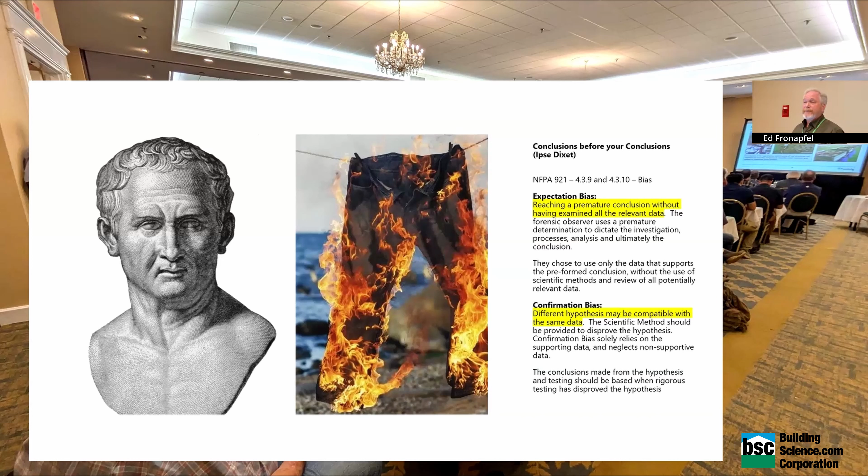Somebody gets paid. The mixing of the products: at this point, they asked for documentation from the builder demonstrating a code-compliant ASW system was installed, considering the gypsum panels are not acceptable for the ASW design specified by the architect. They substituted product, therefore they gave a choice of ripping all the buildings down or to go ask the building department and the architect if it was okay to substitute, specifically the architect. What's the architect going to say?

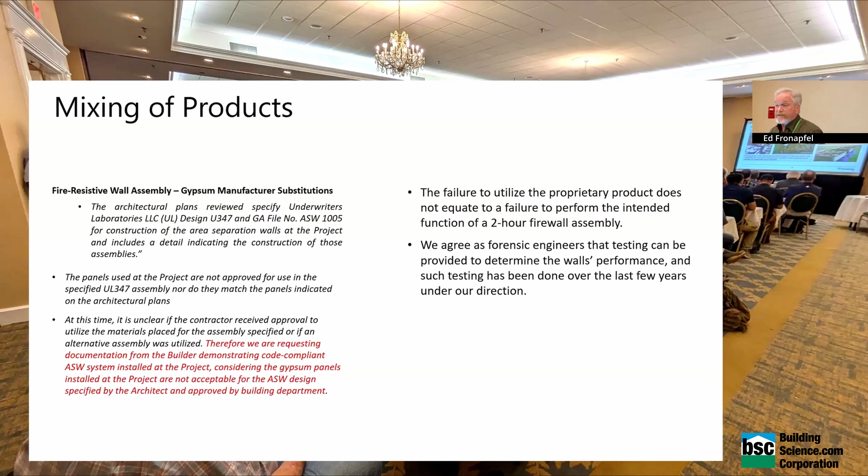I wasn't called out for inspections. I didn't know. I don't find it acceptable. Why does the architect say that? They don't want to be in the lawsuit. What's the building department going to say? Not our problem, right? Now, he does note that we can, if testing is available, and my response was, well, we can test these walls and see if they're the same, right, for that condition.

So they started, it's our opinion, so I highlight it because it's their opinion. Is that fact? It's our opinion that the code-required 2-hour wall rating is compromised when the construction of the ASW wall is closer than 3/4 of an inch. Can you make that opinion without testing? You can make any opinion. Is it supportable? What if I call the manufacturer now, what do they tell me? You need 3/4 inch. Why? That's what we tested. Our test was for 3/4.

Why 3/4? Instead of testing 12/16, why didn't you test 11/16 and give me 1/16 of tolerance? Why didn't you test 1/2 and give me 1/4 inch of tolerance? Why didn't you test 3/8 and give me 3/8? And they said, well, we tested 3/4. Okay, so we don't have that information. We're gonna have to find that.

Now he notes that the clips will cause the failure of the firewall, and during the fire event, the aluminum clips on the fire side will disconnect and everything will fall down. We'll look at the clip spacing. Maybe. We'll see. Oh, and his description in his report, I just like this, because he notes a person in the attic would not be able to see the clips mounted to the head plate below. So he's expecting someone to go up and look down the wall and look for the head clips, but they're covered by the fire block.

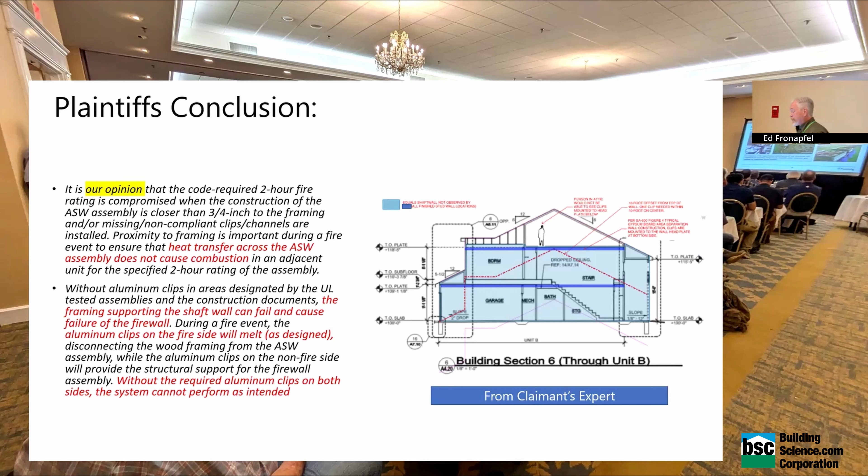Right, so I said, well, then how do you know what's below? If they can't see it, how would you know? Right? Go cut the lower walls down on there. And then we also then use back-to-back C channels, and we looked at the installation throughout the project. Note, they say noted to occur throughout the project. How many attics did they inspect?

So say I have 100 townhomes. How many firewalls do I have? Maybe 99, right? If they're all together, right? It's always townhomes minus 1, right? Depending on the building. So how many is an acceptable sampling for discrete sampling? We don't use the word random, but discrete sampling. I could get paid to get in everyone's unit. That's preferable if they allow me. Right? Enough.

Enough, right? What's enough? It's my opinion that was enough, right? If I saw the same thing in 10% in every building, I'm probably feeling pretty good. If I saw differing conditions at every third building, I'm not feeling so good. If I find out there were 7 framing subcontractors, I want to know which buildings they worked on, because I've got different people, different trades. Maybe the super got fired 6 times. Happens, right? So we want to look at those pieces.

So we're going to get that wall, we're going to build it. Now, the lower photo, one of the questions is the cellulose insulation, will it burn? Tried it up against those metal clips. Will it burn? What's the thoughts? Okay, so I got 1 burn. Okay, hands up. How many burn? Char, I'll take char as an acceptable answer. Okay, so maybe 30%. So we tried to build an attic next to the firewall.

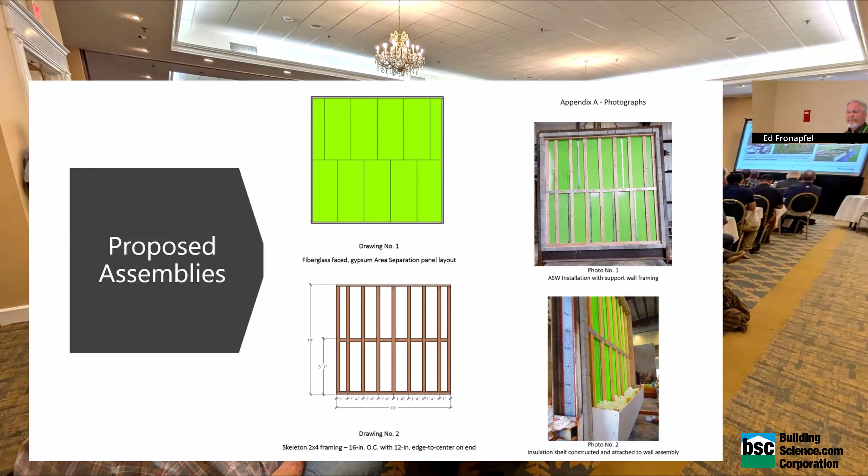So we're going to look at that firewall. We're going to make our recipe, and I'm going to put sensors over the metal stud because I want to know the temperature of the metal stud during the fire. Right? I want to answer the question, will it result in combustion of my Christmas tree that's leaning against it? The one I keep spraying green. Same tree. I'm going to know where I got everything, the date it was received, where it came from.

What about temperature and humidity? How do I replicate temperature and humidity? Should this be green wood? That was last night's presentation. Wet wood. Wet wood's good for this, right? Let your roof leak, get it all wet. Reduce your fire potential. Right? So I want to make sure that it's come to equilibrium. If I'm buying it at 15% and equilibrium is 9, maybe I want to dry it out, acclimate it to its in-service condition. Now that also means in the attic, I need it to be 180 degrees or 150 degrees because I'm in Arizona. So maybe I've got to heat up my burn lab. Not done. I'm just saying, if I want to pick one, be careful of the positions we take there.

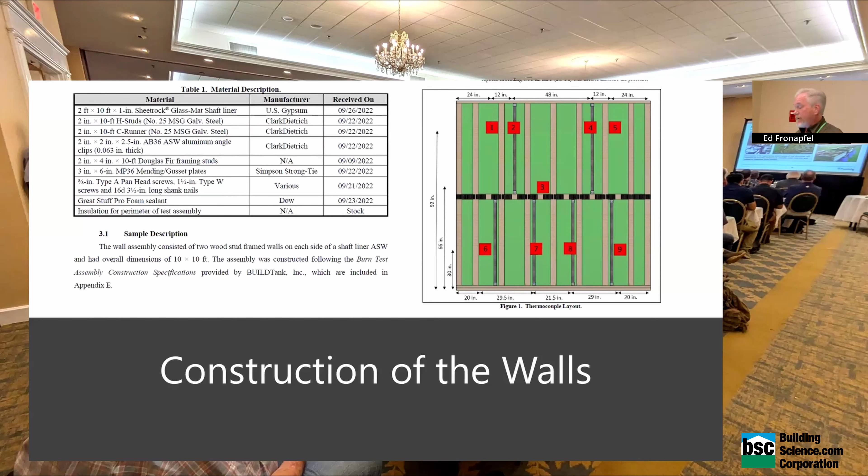So we do our mock-up of the wall, we look at the detailing, and we look at those conditions that they're complaining about, and we're going to recreate those conditions. I didn't know, so I started with a 3/8 inch airspace. And nothing happened. I was able to get my 2-hour rated wall assembly. So I said, okay, on the next burn, let's push the studs right up against the C channel. We'll look at the results of that.

The sensor over the metal track, good or bad? It's good because I want to know, but what's bad about trying to put a sensor on a 3-dimensional plane? It's tough, lots of convective issues. And the lab told us, Ed, this will never work. Well, why not? Because we're going to have all these problems with it. Well, what did the manufacturers do? We can't tell you, that's proprietary. Right, so mine's a scientific experiment. So we put all those together, we burn different ones, we tried different ways to deal with the track and the sensors, and we did have a lot of problems with those.

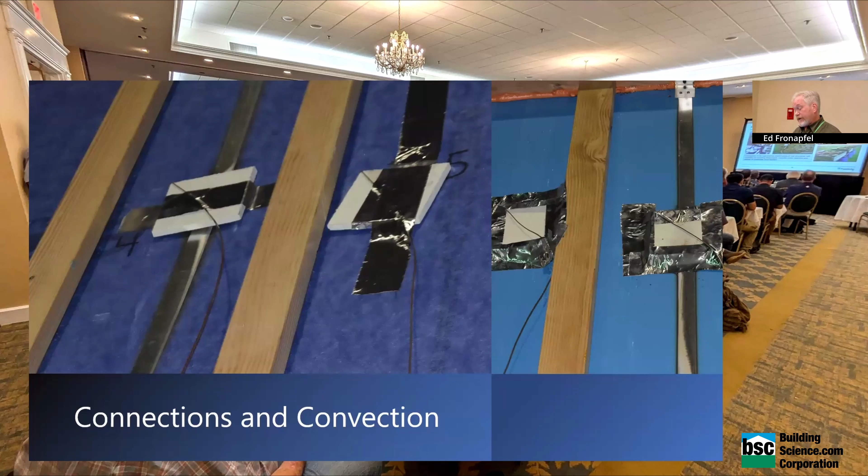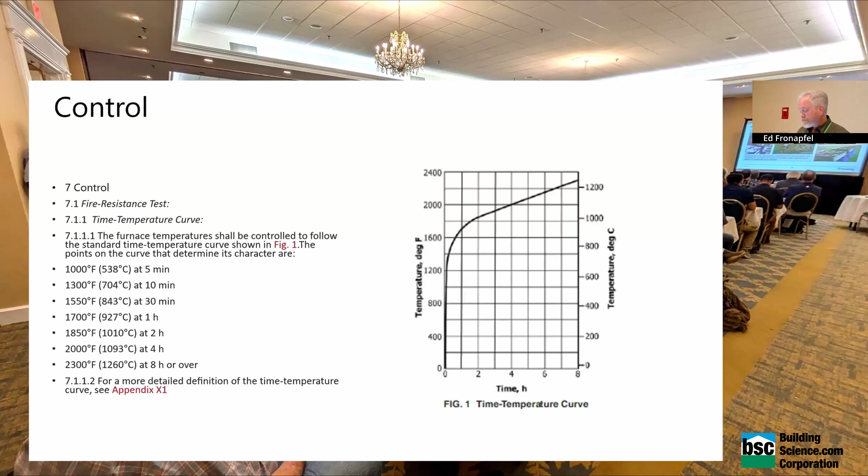Then we're going to go to the furnace and we're going to burn this sucker. And it's not at 1850 the whole time, right? We start at 1,000 at 5 minutes and we work to 1850 at 2 hours. So that's the end goal. So again, in a real fire, what's the temperature? Yeah, whatever it is. It could be more, it could be less. Where is that? This is inside the furnace, on the fire side of the wall. Not your sensors? No, not my sensors. The chamber temperature.

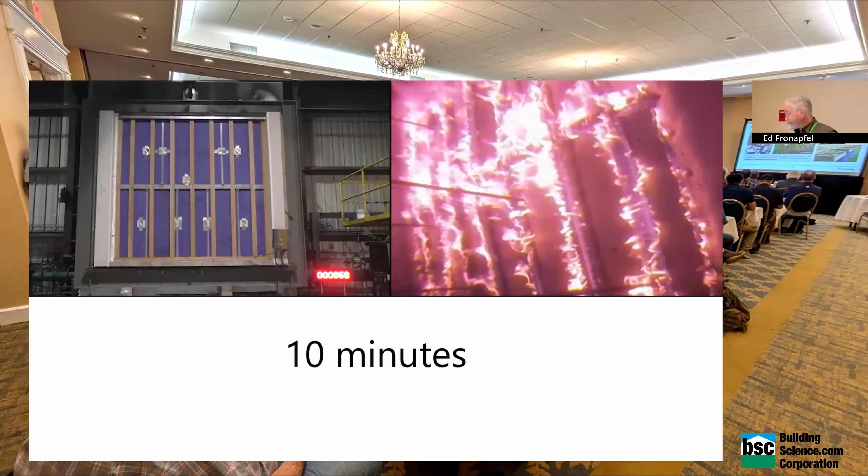And so we light that up. We're 3 minutes in. We are 10 minutes in. Has the wall fallen away? Are those clips melting, and the whole frame just fell down? It's all burning in place together, right? So the aluminum clips didn't just melt and the wall falls in. So we're at 20 minutes or 50 minutes, what do we see?

Kind of cool, right? The wall's buckling inward, pulling itself inward. What's that gonna do, as well as the difference in heat? It's gonna try to pull the non-burn side inward as well, right? So we do have a little bit of structural transfer.

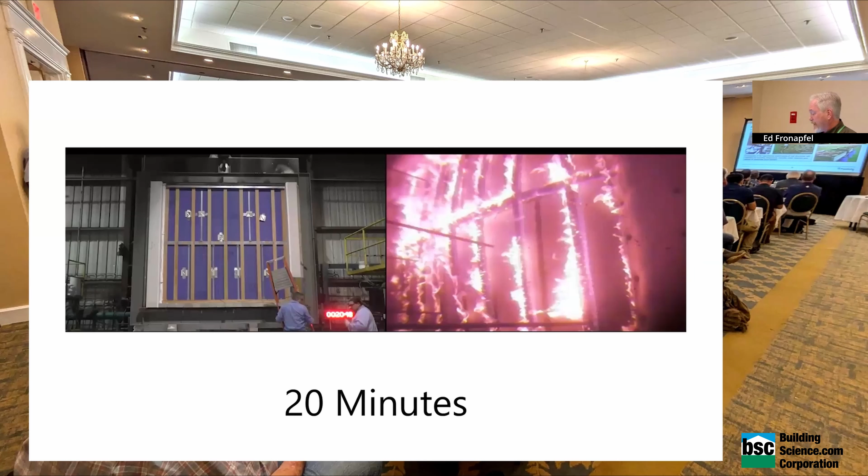20 minutes in, we have nothing happening on the outside, kind of boring, right? They're talking about last night's game, waiting for something to happen. But on the combustion side, very cool. Well, sorry, very hot.

So at about 27 minutes, depending on the wall type, 27 to 35 minutes, we have full consumption. Everything's gone. The wood frame is gone, the attic's gone, the Christmas tree is gone, right? So what happened in that first 30 minutes was really key to get an understanding of where the importance is. Now, am I going to be in my unit next door for 2 hours when this happens? Hopefully not, right? This is a tested assembly for 2 hours.

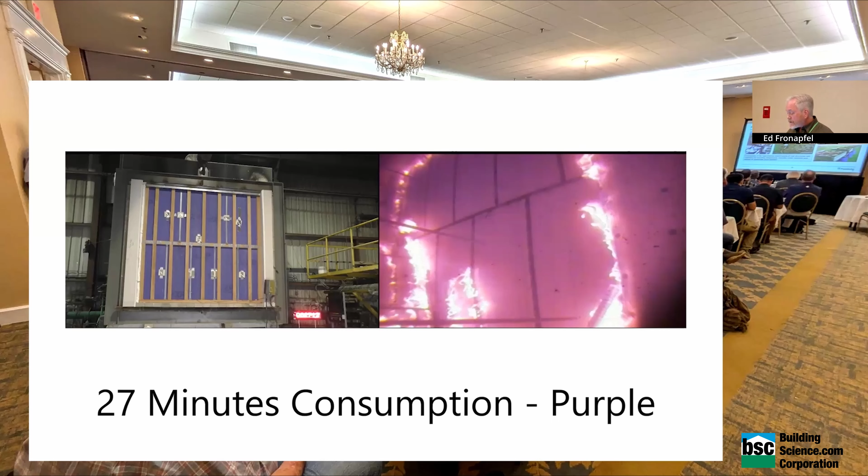So all results, again, 25 to 30 were out. It did not matter which one we used, right? Because we're burning wood. Now, deflection mattered. So this was without clips. We just had the bottom and top tied, 10-foot chamber, no clip. And so this is our failure, so to speak, by deflection, not by a loss there. And guess what happened with the insulation? Nothing.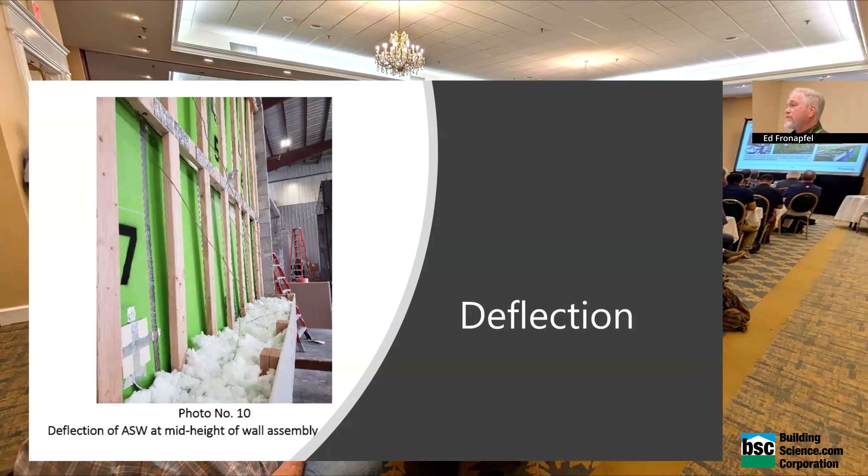Now, granted, this insulation shelf's at the bottom of the furnace, not the top. Could I have higher temperatures at the top of my furnace? Probably so, right? A little bit of stack effect. We look at the edge of chamber, the review of that edge of chamber, and not seeing a whole lot, but we do get some puffing. Puffing is not a failure. A little bit of smoke will puff out. Wasn't considered a failure. And then what we're looking for is charring, right? So that's the burn test.

Now we need to go back to the hose test. The hose test, really late 1800s, 1918, and then 1922, the National Board of Fire Underwriters publishes this. And there's the firefighter standing straight across spraying the wall, the hose stream. Is that going to happen at the firewall when they put the fire out? No, right? This is not for that.

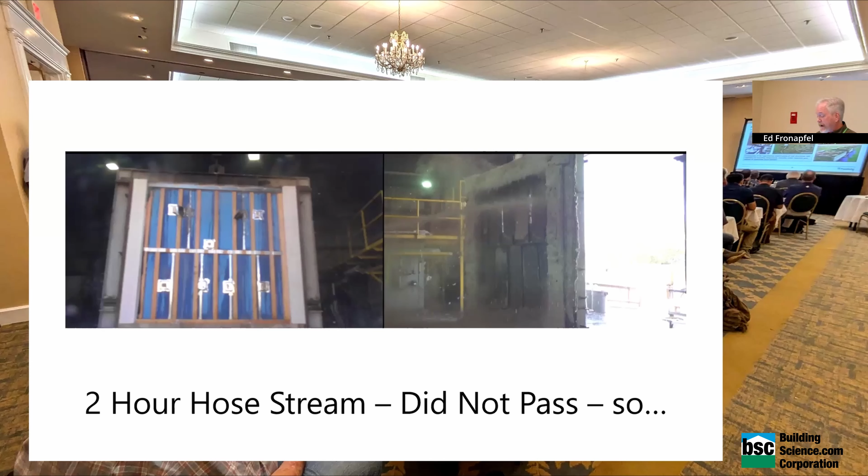So we did the test at 2 hours. The hose stream test only has to be done for a 1 hour wall. So we burn for an hour and then we hose stream test. I don't want to pay for 2 tests, right? It's my money or my client's money. If I can pass a hose stream at 2 hours, I do not have to burn another wall. So we're going to try. We didn't get that one to pass. We did get the others to pass. So for the one that didn't pass, what did I have to do? Reburn a wall for 1 hour, same recipe, and do the hose stream again.

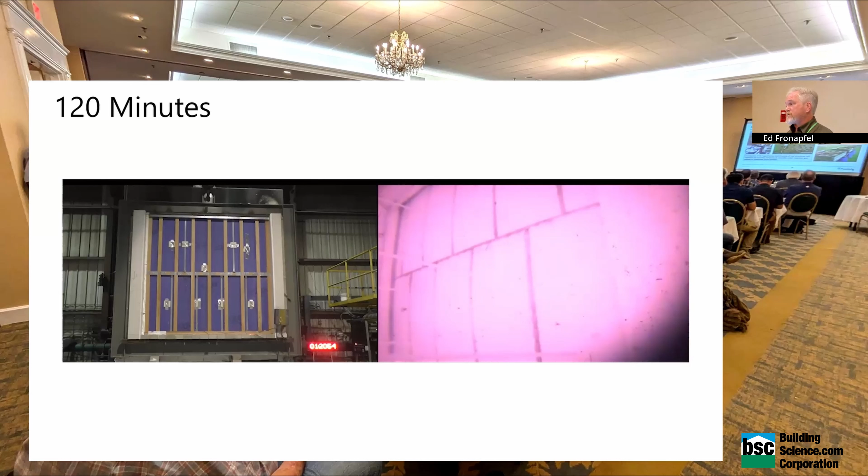Failure? Water penetration to the other side. Good question. So the question, what is the failure of a hose stream? Water penetration to the other side. So 120 minutes, we take it out, we burn them, and then we run that hose stream test, and we can see the pre-test and the post-test. The hose stream pocked it up a little bit, but it did not breach the wall, right? Nope, no water's coming through.

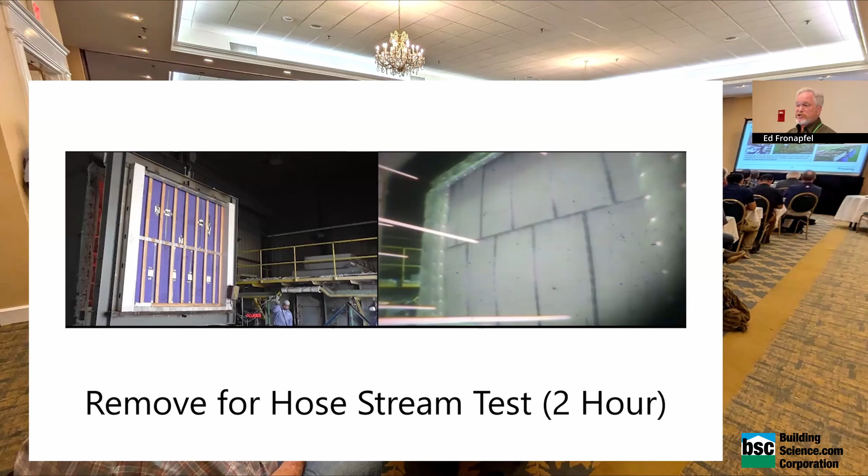And this is the first layer of gyp. The second layer of gyp, as you saw in the photos, was still intact, right? So we really still have 2 layers of gyp. The hose stream's really hitting one layer directly, and then if it passes that layer, it still has 1 layer of protection. So we run that.

And when you do that, you got to get in that crouch position because it's more fun. Make it active, make it active.

And so we had those successful tests, the unexposed side, no water penetration coming through, good tests. So just showing we did those all. So the hypothesis is disproven. From that, the wood frame was going to char. So we said, okay, take all the drywall off and let's examine the wood frame. We don't inspect, by the way, we examine.

Because my insurance company says don't use the word inspection because it's a higher level of risk. So we examined the wall or observed the wall. We did not inspect it. Another word to lose. And we don't have charring. And we don't even have charring where the channels are. Even though the channels got that hot, it did not char the wood.

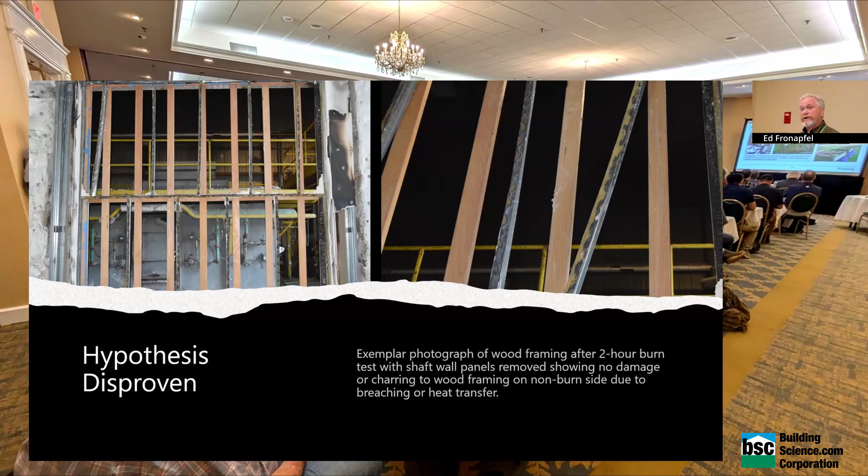All right, so we look at that, test observations going on. This is what we'd love to get from the manufacturers that we just have not been able to. But just look at it, the playbook during the test of what's going on with this. We note at 1 hour 10, we have deflection at 2¼ inches on that wall. So quite a bit, right? That's quite a bit of deflection. Not necessarily failure by amount, but just moving inward, right?

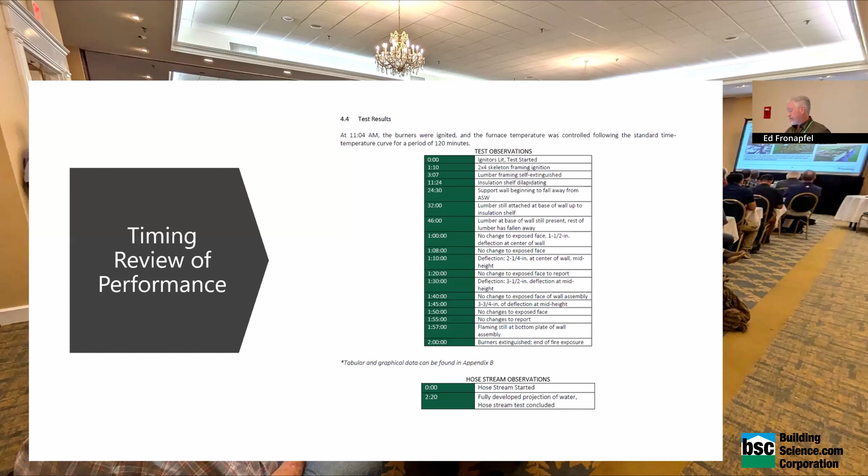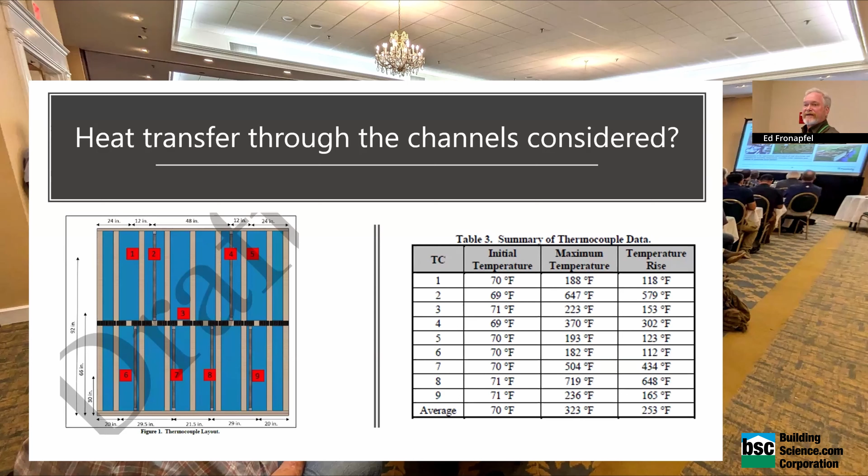So we look at the heat channels, and we're looking at number 2, number 7, number 8. And we can see number 2, we're at 647 degrees, number 7 at 504, number 8 at 719. Why such a variation? Remember how difficult it was to get the sensor tight against that product. 6x6 sensor, and I got this little channel. So I got convective currents occurring. But at least it gave me some data. Everything else, this would pass on that.

And we summarize those tests. In this case, of those 5, we note that we had 3 pass at that point. The 3 did pass the hose stream with a 2-hour burn. Pretty impressive for the industry. 1 did not.

I just need some context. Were you doing this because there was already a fire or because... No, potential life safety issue, $28 million. My client would have to pay $28 million for a potential life safety issue. Who identified it? Plaintiff engineer doing an inspection. Doing an inspection, yeah. After everyone moved in and the lawyer showed up. All right, so.

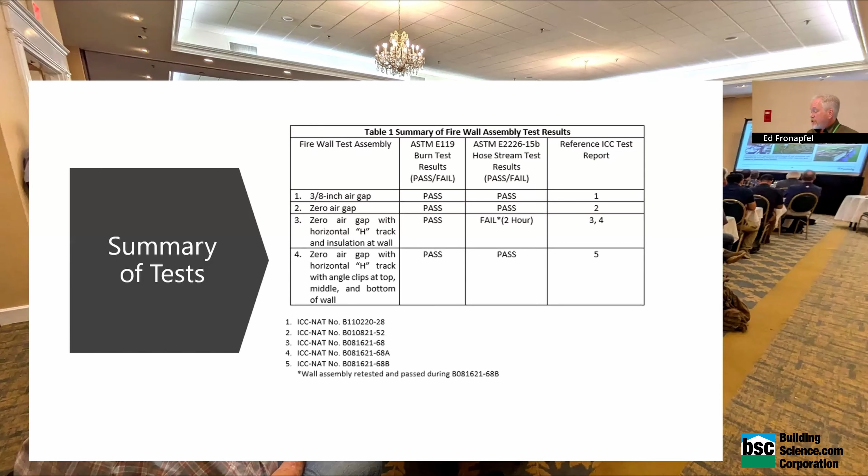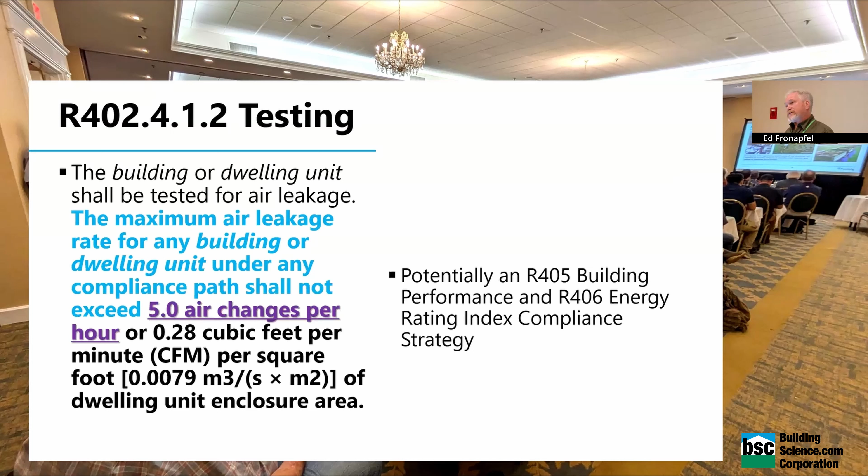I'm at 5 minutes. As I mentioned, you guys have all this. The air sealing information here is from Robbie. So at lunchtime, you grab Robbie and you're going to walk through those strategies. Remember, we are going to try to combine all this together. So again, Robbie's here, and since Robbie helped me, I'm going to pass through so you can see all his pieces here. We're going to get to the conclusions of that.

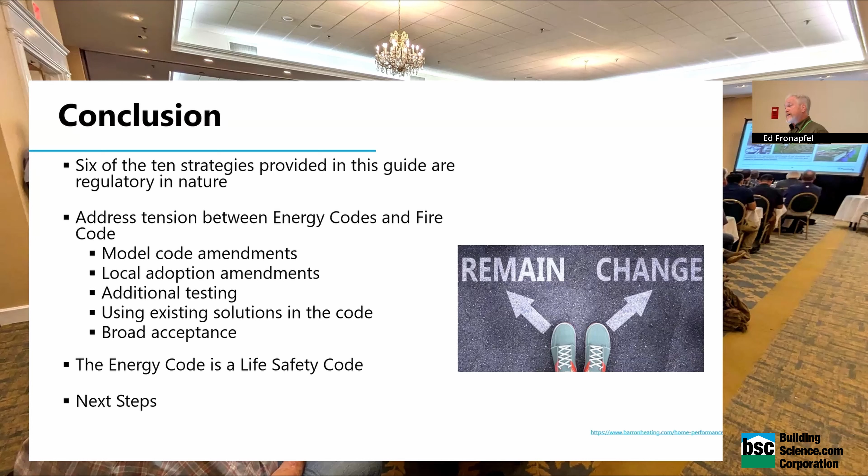We obviously need to address the tension between energy codes and fire codes. What is tested for burn, what is not, what is part of the assembly, what is not. But to answer the foam question, a couple things. So City of Denver, this is now in the code. I don't have to extend the shaft wall all the way to the outside wall. I can block it. Denver did this, it's now in the code. So this is why we want to work with the building departments on how we deal, when this is offset, even more important, how do we detail that piece, right?

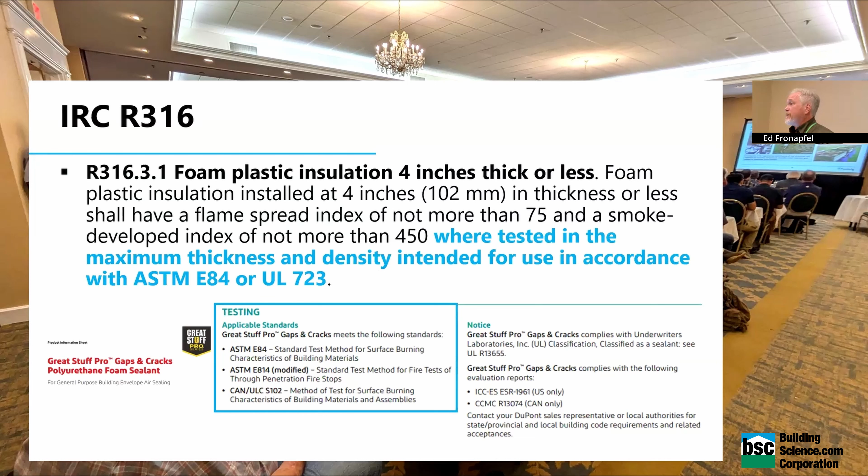So to the sealants, and we go all the way back to the 2005, the 2012, the 2015, by Joe and his team, we need to know the importance of sealants and are they fire rated? And the fact is they are. And again, Robbie's here. He can go in depth about the testing they did, who paid for it, who got the results because they paid for it, right, Robbie? Who gets to promote it? But they all passed. All of them passed, right?

Right. So more were tested, but 5 are listed, and those are the paying parties. So they get to do that. But that's good news for all of us, because we're seeing our builders just go get fire foam and fill it. And the engineers and the architects that are bringing these claims, their argument is those are untested products. They're not part of the assembly, and you have to rip all that foam out and put fire blocking in.

So we put foam on our tests every time. Nothing ever happened. We could not get it to char. It didn't ignite. Nothing happened. Kind of boring. Yes.

It costs between $15,000 and $40,000 per wall. And once the lawyers got involved and found out we burned the walls and they deposed the lab participants, all of them, the price went up. And the desire to work with me went down because they said we didn't want to be deposed. And the depositions were tough, but what it did highlight is things like the humidity and the wood moisture content.